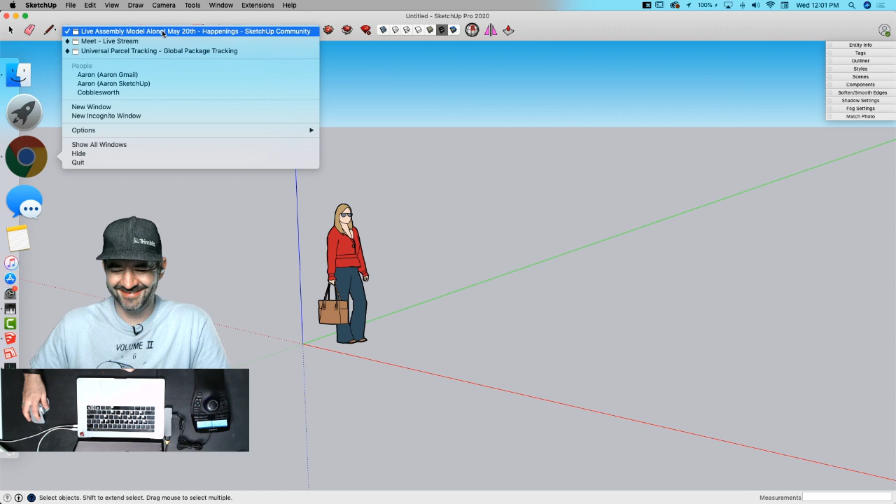It's really cool. Usually my mind's eye just has SketchUp be a group of people in Boulder, Colorado, and then all of a sudden someone not in Colorado is using it. I'm like, what? Where did this guy come from? Turns out there's others out there who like it too. The other thing I do is when I see a SketchUp model in the wild, I'm always like, hey, that's SketchUp. And so then sometimes I'll see the SketchUp blog post a picture and I'll be like, hey, oh wait, that's us, that is SketchUp, literally. Sorry, you can carry on, my wayward son.

Yeah, so we're gonna, I put the term assemblies up because saying machine parts or something like that just seemed to be getting old, but basically they're very similar. I got some drawings here of a couple pieces, and by pieces I mean they're actually like multiple 3-4 pieces that have to be made, and then we can put them together. And I like that, I thought that was cool because I really liked the pieces we were doing before, but something in me just really wanted them to fit together somehow.

And none of them actually lined up before because I don't know where they were all from, I was just picking stuff off of the internet. But these are actually things that go together. So this is a plummer or bearing block. And then I posted the second one, which is, okay, I don't actually know what any of these are. I think this is a kind of bearing block too, maybe, I don't know. It's called a crosshead.

So if you guys know, I mean that's bearable, nice. Someone will tell us what it's actually called or what it actually means soon. I won't say anything else dumb. Somebody who knows what these things are, feel free to enlighten us, because yeah, we're just, we don't know, we're making it up, we're making stuff up.

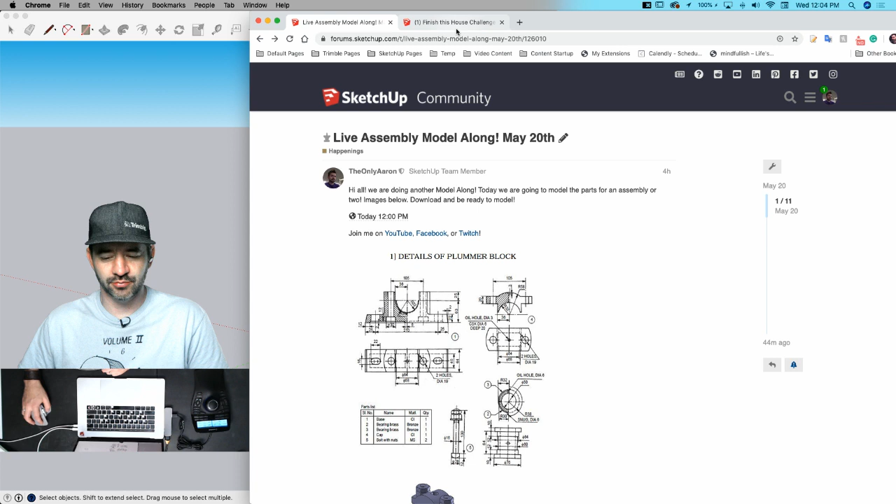Dave Richards, who may or may not have already modeled these, is pointing out that the crosshead is used on a steam engine, so we have a steam engine piece. Wikipedia says it's even used in internal combustion engines, which I suppose is a steam engine, but also other stuff. Well, except there's no combustion. Steam engines don't blow up, right? Well, no, that's true. Internal... well, I mean, pressure, ideally, constant pressure. I don't know.

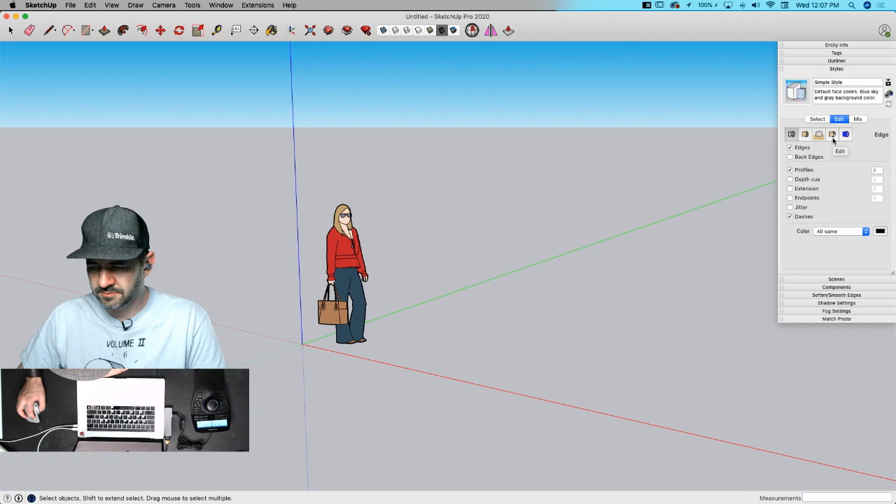All right, so I'm gonna come in here into, as usual, go to my styles. I'm going to edit my current style and go to my watermark tab, 4th one across, and add a new image from my desktop, grab that first one, which is that base piece, and bring that in. I'm gonna put this in the background, fully opaque, and position it in the lower right corner, get it a little bigger. I have to check and make sure I don't remember about my fat head being in the way too, gotta optimize space on the screen.

Ooh, your fat head. Yeah, fat head. If you didn't wear a hat, you might have a little extra room there too. Okay, so here's the thing you mentioned, my hat, which by proxy mentions hair. I've decided this is how I'm going to measure how far into quarantine I am, is how many knots I have to brush out of my hair in the morning. Because normally my hair is short enough that I just kind of use my fingers to get it where I want it and I'm done. But it's getting long enough that I have to actually brush it. Today was a 3-knot day, I hit something 3 times. So that's how far into quarantine I am.

So in a meeting this morning, Andrew over in sunny UK had no hat on, and he looked like he was just embracing bedhead. His hair was just crazy. So I kind of wanted to see what you can do to really build out your coiffure. Maybe I'll share an image on my own social media channels. It seems unprofessional to walk in front of the SketchUp audience representing my company with that thing happening. That's true. These are the most professional things possible that we're doing here.

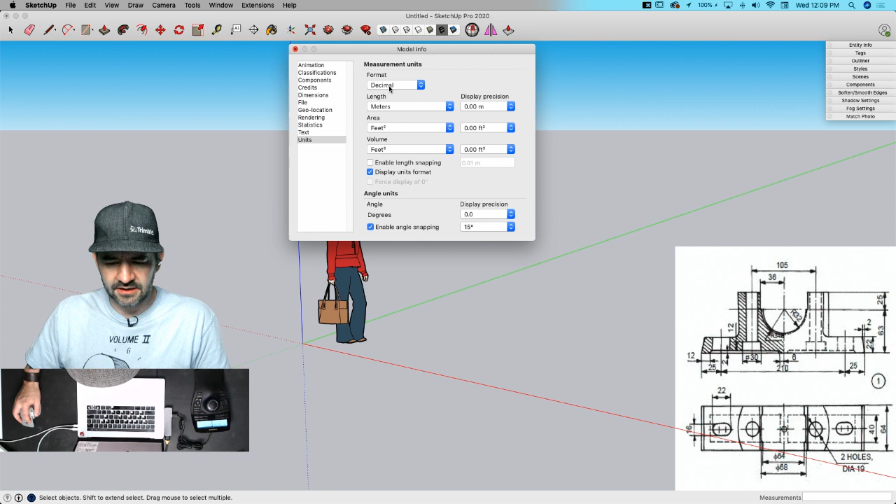Okay, so I'm gonna get in here. I'm gonna go into my model info and modify my units. I'm gonna go to decimal meters. I want to model everything as meters, and then with your help, I'm gonna scale it back down to millimeters when I'm done, which I'm assuming everything here is in millimeters. And it looks like we don't have a whole lot of fractional values, but I'm just gonna go to 2 decimal places. That feels pretty good. I'm gonna disable length snapping. I don't wanna use that at all. And my angle snapping is 15. That should be fine. I think my angles, I don't know that I'll be rotating a whole lot of stuff, so that's what I'm gonna set up with. Decimal meters, two places after the decimal accuracy.

All right, with that, let's get this thing in here. So there's a couple ways I could go about this. My inclination as I look at this block is I see that I have a little bit of a round thing going on here, but my initial thought would be to come in and build this profile first, so build that chunk like that. Well, maybe not. Maybe I should start from the bottom, work up. Yeah, actually, I'm gonna do that. I'm gonna start with this rectangle right here, and then work my way up until I get this post up, and then I'll come back to the side then and cut this chunk out. That's what I'm gonna do.

All right, so I'm gonna start with this rectangle right here. So my initial rectangle is going to be... 260. Oh, is that 260? Yeah, plus 25 and 25. 25. By 64. Something didn't go right there. Oh, yeah, let's try that again. All right, now that that's out of our system, shake it out, shake it out. 260, comma, 64. Still big, different big. It is big. I mean, it's many meters large.

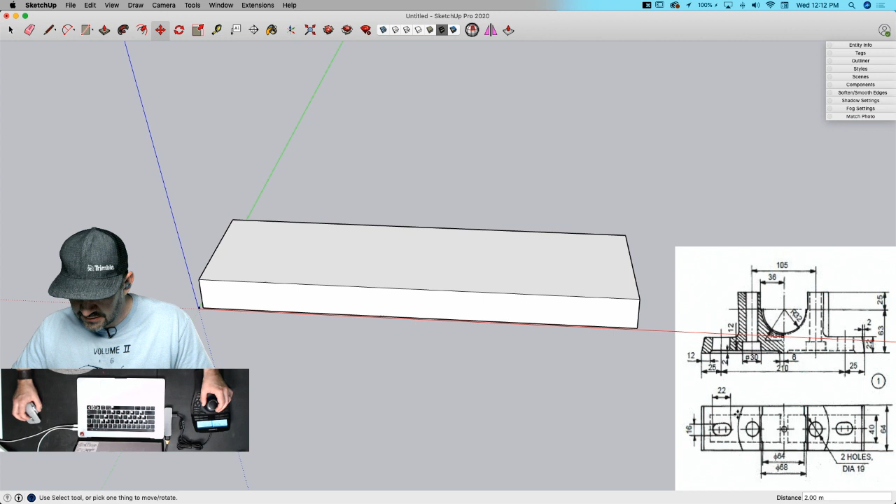I'm looking for a dimension here. This might be the piece. Dave said there's one dimension I'm going to want off, or take off of the other drawing, and maybe this is it. Are you gesturing at the curve there? Yeah. I don't have it. Radius 72 is what it says on that other picture. Is that on the big one? Oh, okay. All right, so I'm going to do this. I'm going to get a couple of reference lines. I know, I'm going to take this to the middle, and take one this way to the middle, and then I'm going to draw a circle. I'm just going to stick with 24. I'm not going to get fancy. 24 is fine. 72 is what the radius was? Is that what you said? Yes, sir. All right.

There we go. All right, looks about right. Take that now, that's going to come up an amount. That amount is 63 and 25.

So what I could do, I don't know, I'm just on a reference line kick. I'm going to pull one reference line up 63. I want to pull another reference line up 25. And the advantage of using reference lines right here is I can come back and still use them later on. So I'm going to pull this one up to the top. But when I come in here to cut this piece down, if this reference line's still here, I can use it later. Did I make those just off? Oh, I pulled them off of the... how about that? I'm gonna get rid of a couple, I don't need the center one anymore. Okay, so far so good.

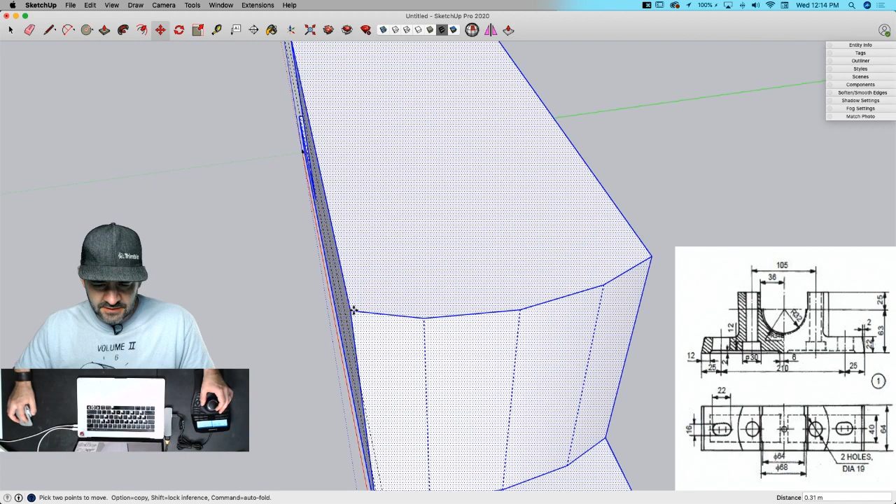You know, it's funny. So as a person who is not a fan of math, I now have children who are required to do math. And like most parents, I tell them, well, it's necessary, you'll need it at some point in your life, which is true. I did, when I did building design, I had to do a lot of mathing. But I still feel bad because the only time I've really had to use algebra is to help my kids with algebra. I feel bad to suggest I'm quoting some Facebook share, but I saw one yesterday that said parents will understand 1/3 of their kids' math, but the other 3/4 they will not understand. Sounds about right. That math checks out.

All right, just because it's going to be easier, I'm going to put these holes in right now before I go cut this block out here. The reason I say it's easier is because as soon as I cut this middle chunk out, I don't have a flat surface to pull a dimension off of. I can always inference, so there's no point where I can't inference to where the center of something is, but it's going to be a little easier to go this way.

I can come in here and from this center line, pull a dimension line over. Well, it's half of 105, so it's 52.5. Look at that. Division. Who knew?

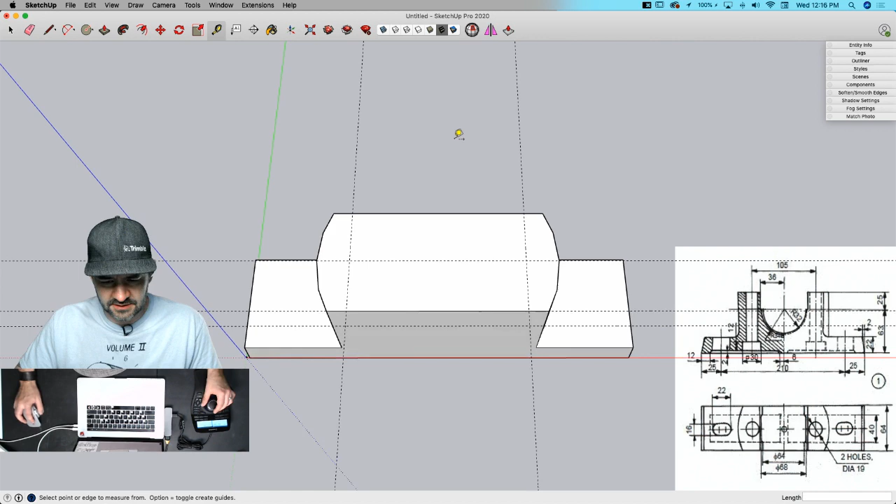Just to get those, and then if I wanted to, I could also go like this and pull that down to the center there. That gives me the 2 holes here. So it's easier to work off this flat before I go in and chop it up.

So my diameter on this is 19. So I'm going to put a circle right here. That is 19 divided by 2. Bam.

19 halves. Nice. I'll just take that - you are using a gigantic calculator, so you might as well. That's right, it's almost like if you don't make the computer do the math, why are you using a computer? My computer can do division too? Wow, and look at Facebook? Get out. Yeah, I know, it's awesome. All the things. Can you even believe it?

All right, so continuing through here. So I have that brought all the way down. And then I have little countersink holes here that are at 30.

So what I'm going to do is I could do an offset, taking this hole as it exists and offsetting half the difference. But for me, I feel like it's going to be easier to go to the center of the hole and just pull it out 15, rather than try to do the math. Let's be honest.

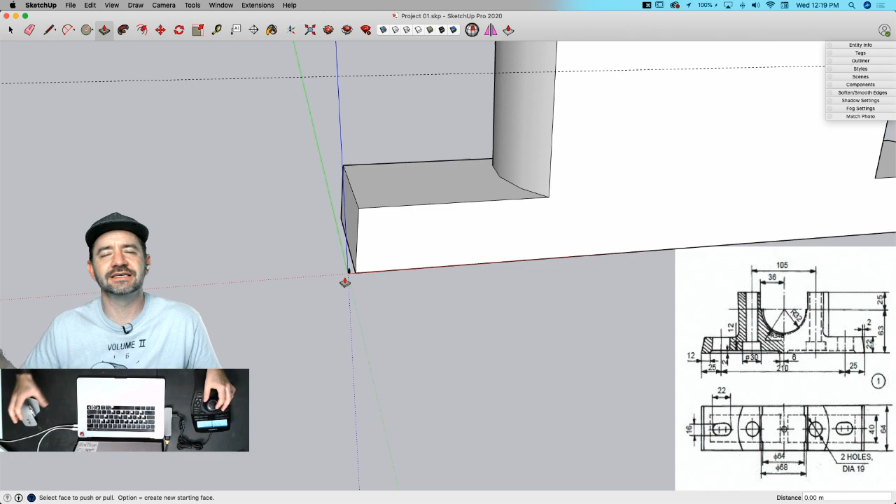All right, speaking of these rectangles down here, let's put them in. I'm going to use a couple more reference lines, or guides. I'm going to put one right at the middle, and then we'll put one at the middle right here as well.

So this is 20 up, 20 down, because it's 40. Those dimensions right there, this direction, right here. 6 over from the center line, and then 12 over from the end. That's my rectangle, so I'm going to draw my rectangle right there.

I'm going to take it, copy it. Actually, we're not going to copy it, I'm going to mirror it, or rotate it. So I'm going to go to my middle point, that's right here. I'm going to do a vertical mirror, modifier key to copy it, mirror it right over there.

So when you have a surface that has multiple pieces like that and you copy more pieces into cut, this can happen. This is not an odd thing to have happen. Usually if you just come in here, throw a couple pieces to stitch it together, it'll come right back. This should do it right here.

All right, then get rid of these pieces, that line. And then that, as I already know, is going to push up 2. So I'm going to put that up 2. I'm going to reverse this face before I push it up 2.

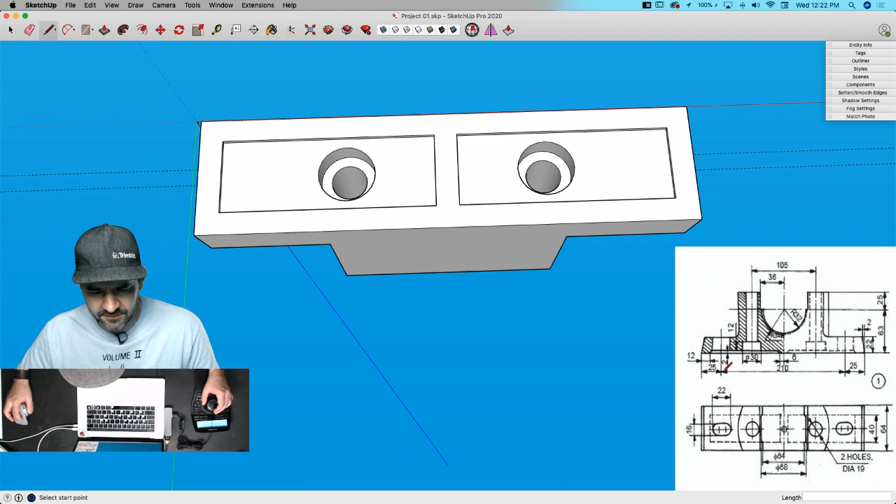And I'm looking at this now and I'm realizing it would have made more sense to put this next circle in beforehand, because the dimension pulls off of here rather than the top, but we'll work it out. So the center of this thing right here is 25 over from the bottom. The reason I say that's an issue is because the top, remember, we moved over 2 already. So what I'm going to do is grab a reference line. I'm going to pull it over not 25, but 23 to the center of this piece right here.

Grab another center line, or reference line, or guide. Why can't I just say guide? Just say guide, dude. Come on.

And then I'm going to use some more guides to put this out. So it's 22 wide, that means take this one this way 11, or 22 halves - that would work also. And then this is going to come this way 8. I'm going to define everything by the number of halves it has now. It works. That's all I'm saying is it works.

So what I have here is basically a circle, or an arc and an arc connected together to make an elliptical type shape. So what I'm going to do is draw a circle right here in the middle and pull it straight up, and I'll draw a line like that.

I'll grab this piece. YouTube said you are guide averse. I mean adverse. Wait, adverts. Averse. Adverts? We'll go with that. Like advertisements?

All right, sure. I'm going to grab these and Command X them, and then Command V them. That looks bigger than the picture for me. Sort of. Does it? It might be. We'll see.

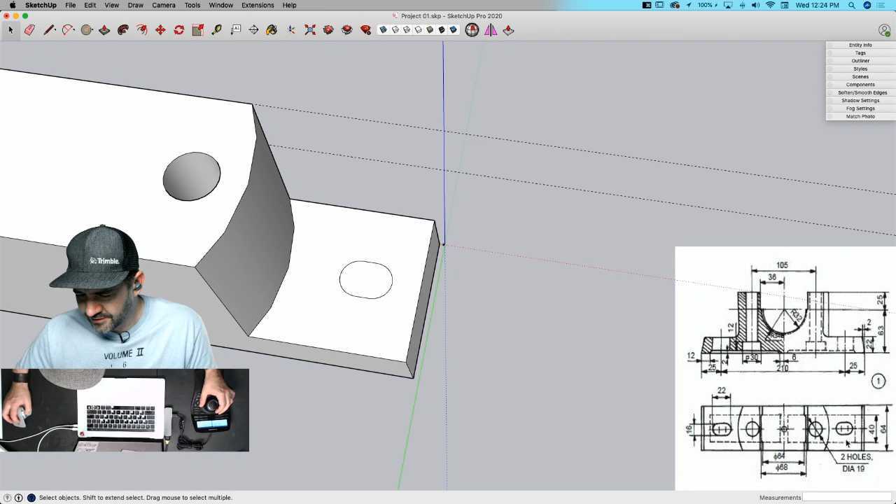This does look like it may have been hand drawn, because another thing I noticed is this hole looks slightly lower than this hole. So it's possible that we're dealing with non-3D modeled stuff here. Wait, what? I know it happens. This was probably designed before SketchUp, and SketchUp is 3D for everyone, but apparently someone just didn't care. I heard there weren't three dimensions before SketchUp was invented. Everything was so flat back then.

All right, so I'm just going to use rotate to go to the center. I can reference the center of these arcs since that's right in the middle, and rotate that around 180 degrees. Then I'll use push-pull to push that to the opposite face, and double-click on this one. There we go. I'm going to triple-click because this is bothering me. Go to Soften and Smooth, turn on Soften Coplanar, and save.

Whew, it's a close one. Close call.

All right, doing good, this is looking good. Let's get back into this main piece right here. So this is most of this block. I have the little indents down below, my countersink for my bolt hole, and this I assume is for screwing this down to some surface. Everything's looking good right now.

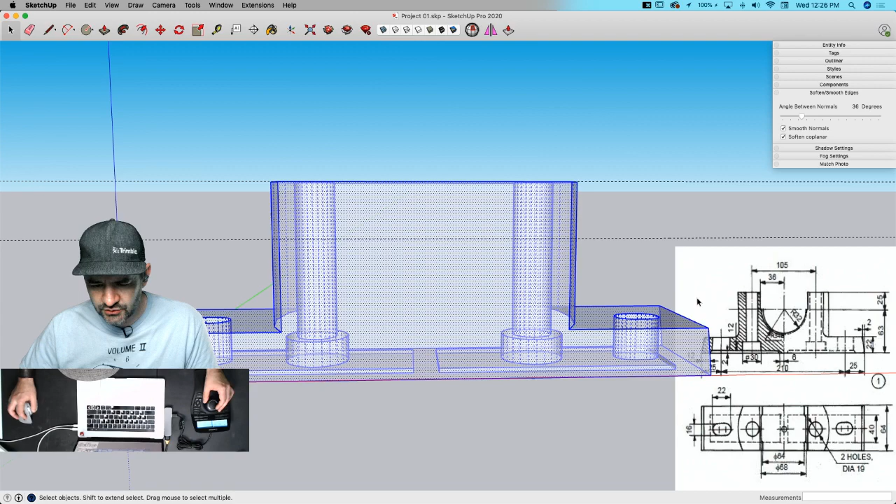So I need to get this piece right here, let's do that. This circle, which has a radius of 32, is at this line. Get rid of X-ray. It's right at this line where this line crosses. I'm going to grab my circle, use the inference off the center of this top line, come straight down to here, and pull this way, 32.

All right, I'm just not doing anything right this second. So what I have here, I'm going to draw a line straight up, and do a guide again, come this way, 36, and take one this way, 36. That looks like that's the piece I need - go over to here, up to here, here to here, and here to here. Then get rid of all of this stuff, and push that back to the back wall.

According to the dimensions, that's correct. So it does look like, again, maybe because it's hand drawn, that lip doesn't look quite as big on the drawing, but that is what the dimensions call for.

I think we just finished a piece. Actually, it looks like there's a second lip here. All right, might have to go reference the other drawing.

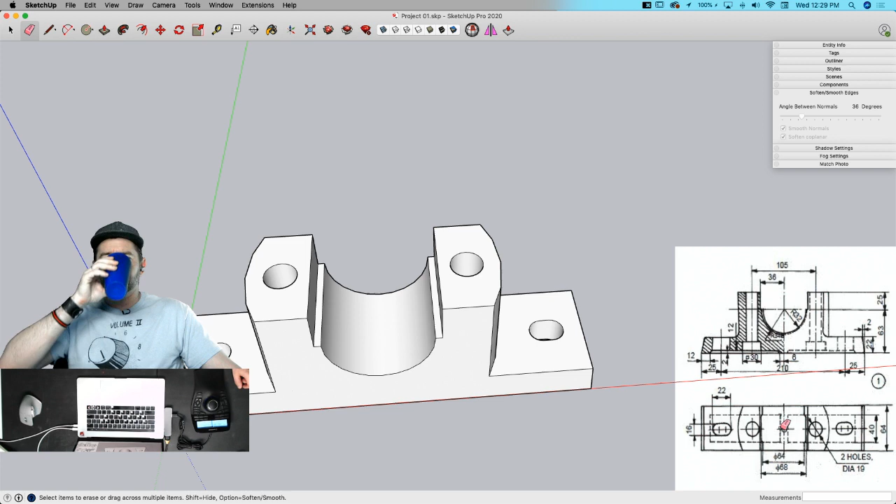Oh, hold on. So I'm leaning forward with my squinty eye, mouth open thing trying to figure this out, and it's still not working, my teeth are all sticking out. Have you tried turning your head to the side a little bit when you do that? Wait just a minute, I'll turn down the audio, I'll turn my radio off.

So this is what I'm seeing right here, this piece right here, but I don't understand, it comes back on this side too. Wait, where's your cursor? I don't know what you're pointing at. Oh, over there, I see it. Sorry, over here. So it comes this way, but then I also have one that goes this way.

Is it thinner on the inside, or thicker? Is this 32 the inside? Oh, it's the same depth as the notch. So the reference picture has got the top on it, if I were seeing transparency, it's as deep as the notch. So is it this? Is that what I'm seeing, or is it the opposite, where the thicker piece is on the outside?

I don't know, but it looks like - oh sorry, I was looking at the reference picture under my head. Sorry about that, New Southern Workshop. See? Told you my fat head would get in the way, just take that thing off.

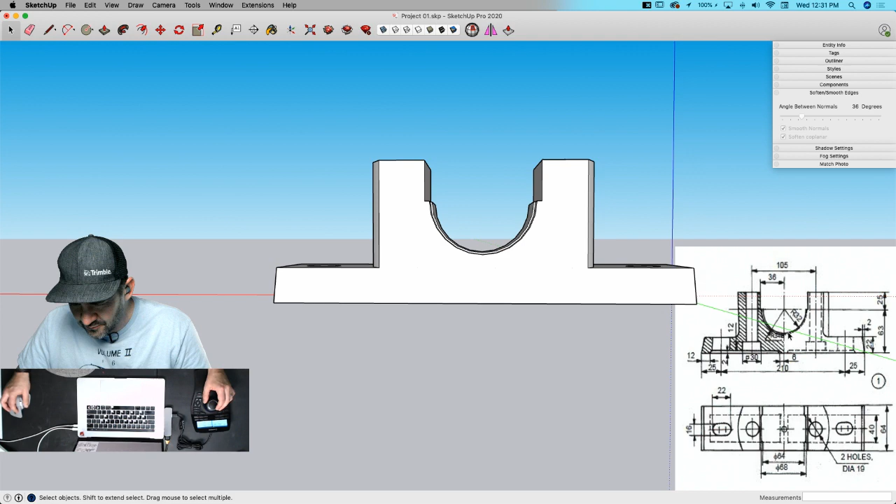So let me tell you why I think this is correct. Because I can see a little line right here, not just on this cross section, but on this side too. See the second line? So I kind of feel like that's correct, but I don't feel so convinced that I would argue if somebody told me I was incorrect.

Looking at that other picture though, it looks like you have it backwards. I know, this coming here, but then again, here we look at the reference. This shows it coming out like that. See that, right there? But maybe that's part of the top piece.

Oh, since that's the bearing that comes out like that? So there's a hole. Oh, because it's for lubrication. Yep, yep. Okay.

So here's what I'm gonna do. I'm gonna take this piece right here and copy it back out to here. I'm gonna do the same thing on the other side, grab this piece, and copy it out to here. Now I'm going to push this all the way through to get rid of it. So this right now is at the smaller dimension. I'll take these outside pieces and push those through to that inside depth, 12.

I should just be able to double click this one. There it goes. And now it gets rid of these extra lines, so that is the hole, because there's actually a hole top and bottom for running lubrication through here, and that would be the channel that would lubricate between the body and the bearing. That makes a lot of sense. I'm gonna save.

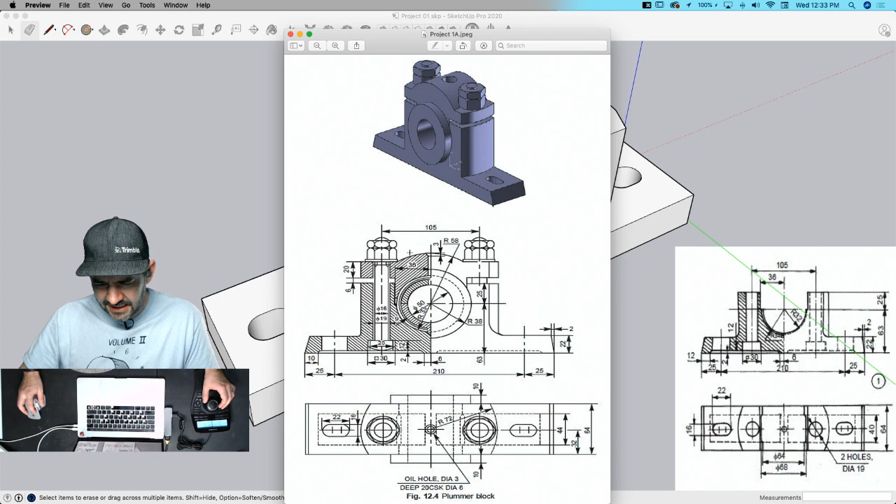Maybe it's like plumber, it was just named after a guy named Jeremy Zirk or something like that. That makes sense. This actually only shows it on the top, so I don't know why they're showing it on the bottom, it would all just run right out then.

Alright, I'm going to grab that piece, make it a component, and call it... sorry, part of 1. Jealous Elephant just said to just say nipple. And the 10-year-old in me just giggled at that.

It happens. Alright, I'm going to take this image now. I'm going to say that we're good with this for now. Wait, Dave said something about checking my holes down here. Well yeah, make sure the hole will actually fit the bolt or the nut in there later. We'll come back and mess with it if we have to, but I'm going to work off of this for now, just rework it later.

And this should be 19. I'm just going to verify that I did do the right numbers. 19, okay, so new piece. So I'm going to go back up to my styles and grab my existing watermark, double click it, browse, and switch to my top piece, which I think is that guy right there.

Looks good, that's small enough. I'm going to make it even a little bigger. Okay.

All right, so some of my dimensions on here are going to be pretty easy. In fact, I could probably steal some geometry. I think I can come in here, grab this piece, this piece, this piece, this piece, this little tiny piece right here, and this piece right here, and Command C to copy it.

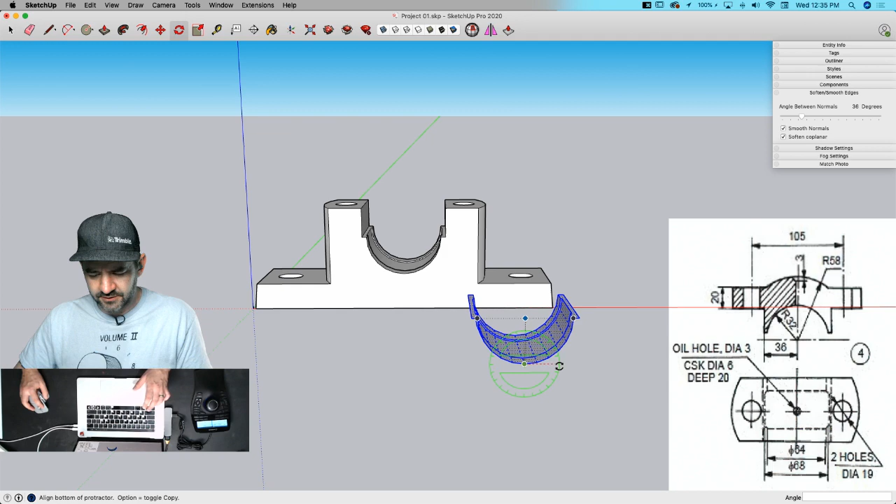I'm going to leave context, get all the way out, and Command V to paste it. And then I will take that and use rotate to just flip it over. And now I should be able to take that and place it right here. That should be the perfect fitting piece from the other side, except that would seem so perfect.

But it doesn't look like it actually comes all the way down. See that? Look at that little gap right there from the radius. So I'm starting right here. It looks like it's up here a little ways. Is that just the hatch pattern? No, because it's on the non-cut through side too.

See that? But it doesn't have a dimension for where that is. But it's still geometry we can use to build this out. So I'm going to leave it right here, just leave the geometry hanging out, not doing anything. And I'm going to build up the top and just intersect it out, and we'll close it out somehow. I don't actually have a vertical dimension, so I don't even know what that is.

So hold on, let's take a little peek back over here and see.

No, it looks like it comes all the way down on this picture. Oh no, but there's a gap. That makes sense. Mind the gap. There is a 6-millimeter gap. That's how you would clamp it shut. That makes sense. Okay, so 20 with the 6.

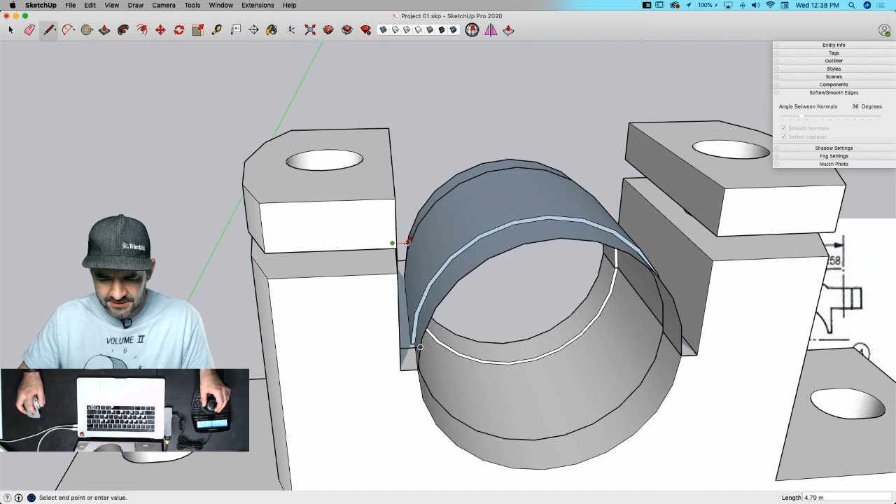I go straight across this way and back up. That gives me that face there. Do the same thing on this side. I'll come straight across like that. And just to close out the side, I know we have an arc here, but I'm just going to do this to close that.

And that would be half of this. Oh, kind of, I'd still have to come across here. Like, click there, click there, click there, click there, click there, and, oh, that closed it. Then I could get rid of all this geometry here.

Something like that? Maybe so. Maybe so. Maybe. Look at the other drawing. I closed it, can't look at it ever again. Ah, I know, it's the worst.

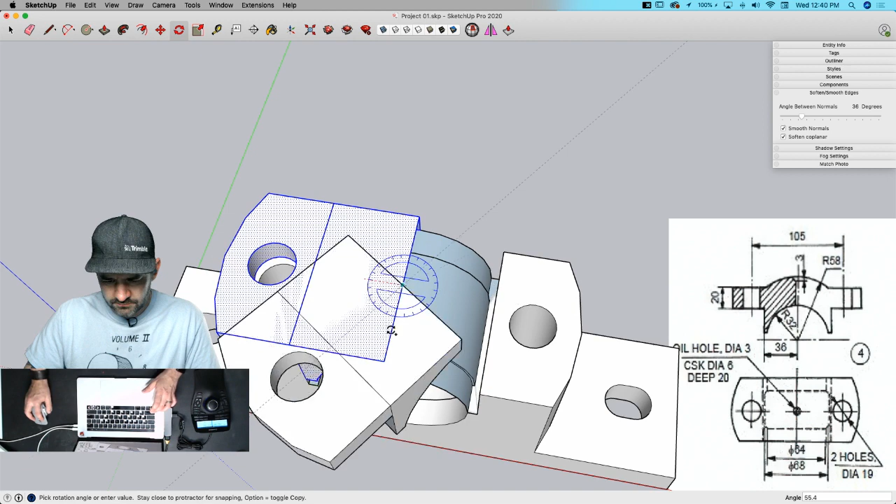I keep getting confused because we have to put in the bushing or whatever. Yeah, there's going to be another piece in there. I'm going to grab all of this, rotate that around the center here, like that. I can get rid of that line anyhow. And get rid of these pieces in here.

Whoops, something didn't break. Something didn't break. Oh, I didn't do what? What? That was it.

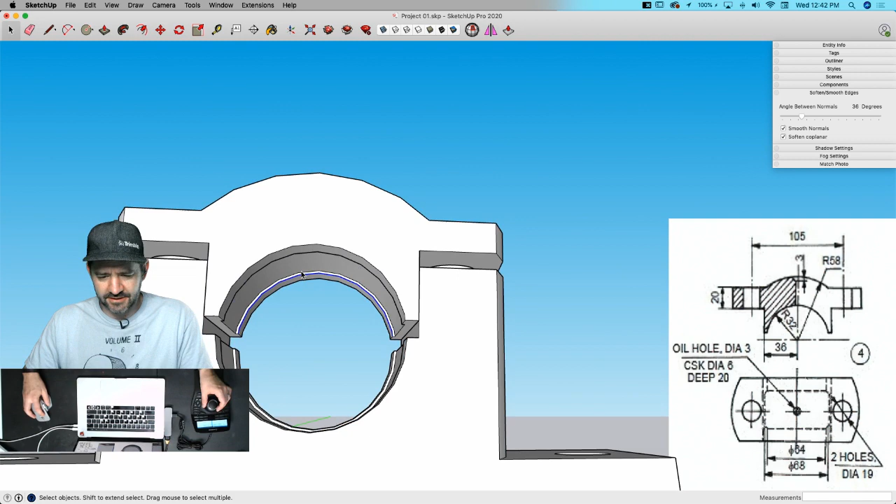All right. So what we have here, if I put a line right across here, at the middle of this line, I want a circle that has a diameter of 3 going down there, and then at 3 deep, it's going to open to 6.

Hold on, I got a couple of questions that I don't understand. Yeah, I was trying to understand them to then repeat them.

Okay, so for the circle, I just decided across the board I was going to draw everything with 24 sides. And that was just something I started with, and I'm just sticking with it. If I was actually planning on printing this out and wanted a smoother circle, I would probably do that arc with more sides. But I'm just sticking with 24 in this particular case.

I think Alejandro was asking a question unrelated to this model, because he had a question right above that too. He's wanting to do organic elements. Yeah, if you're going to do something more organic, then yes, I would suggest more sides.

But that's really up to you. If I'm doing organic, I'll probably do something more like subdivision modeling, which breaks it down so I don't have to work in high polygons. I can work in low polygon versions and then increase the organicness for output.

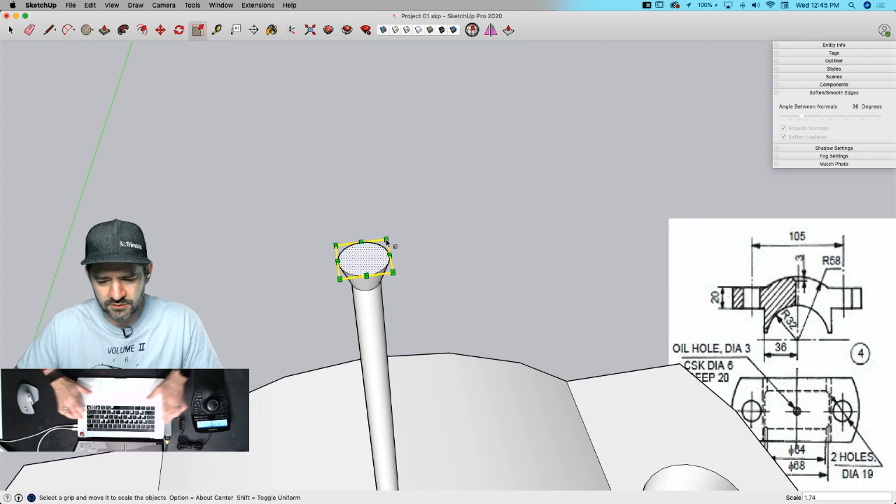I'm going to pull that up some amount. And then at that amount, I'm going to do a push-pull with a modifier key to pull that up 3. Then I'm going to grab that piece at the top. I'm going to scale, pull about the middle to 2, which is going to make it twice as big. So this circle right now, this here is 6. This circle is 3. This height right here is 3.

Now I can take all this geometry, grab it by this edge, move it vertically straight down till it intersects back into that piece. It sticks through because I made it long. Now I can grab all of this, right click, intersect face with selection. And then all I have to do is come delete some extra geometry. Not bad. Orient faces. Thank you very much.

And I will just alt erase these 2 lines to get rid of those. So there we have our, I almost call it a fuel port, our oil hole. Oil hole. Oil hole. Thank you. Okay. Let's triple click that.

Make component. And this is part 4, according to the drawing.

All right. And I would probably save at this point. I don't know about you, but we'll give it a shot. We'll see what happens. What's the worst that could happen? Nope. Let's not talk about that. There's some wood to knock on.

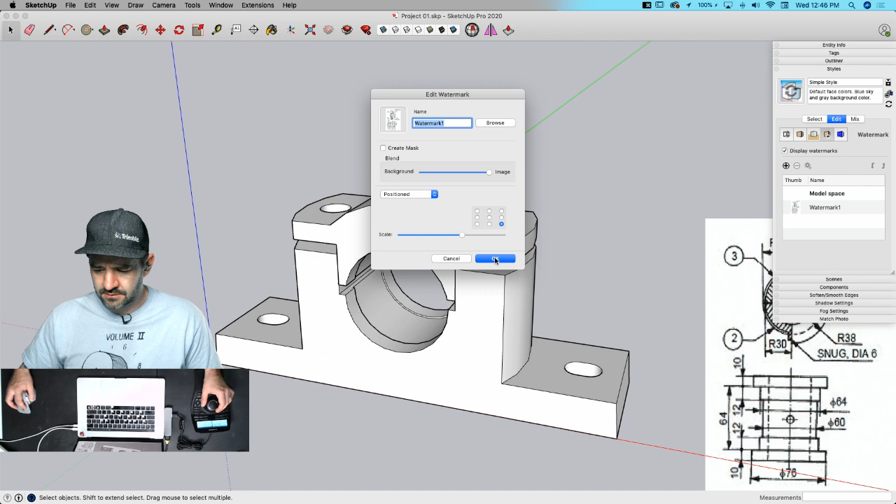Right here. Okay. This should be pretty easy because this looks like this is just a bunch of stacking holes. And I don't know if this is where saying stupid things like this should be easy is where I get shot in the foot, but I'm an optimist. Definitely a Murphy's Law moment. That's right. Yeah. Let's see what you got, Murphy.

All right, so I'm going to start with a circle and put it at the center. Inference over this, put it right here.

So if I pull that straight up till it hits an edge, I get 32 or 64, which I have on here. So if I'm going to make that circle, that's right here, that's this dimension right here. So that amount goes in 12. I'm just going to pull that in 12.

For the sake of making this easy to see, I'm going to hide this top piece. So that's what I did, I pulled that in that amount. The inside ring right here is 60, so I can draw another circle from the center there. Pull that up 30. I'm trying to align my axes, so every time I'm always pulling straight up or straight to the side, following the blue or red axes.

And then I can pull that one this direction. It should be just right here. Yes, 64 minus 24. And then here I can draw another circle, pull that straight down, that again is my 64. Whoops, I missed it. Pull it straight down.

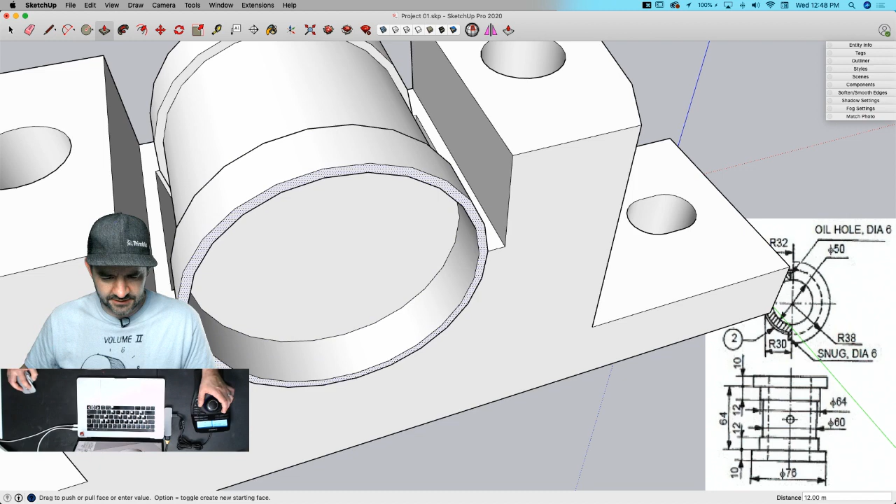Straight out, that's my 32, aka 64. Pull it out to here, and pull this one out to here too, and erase that circle. All right, so we have this piece and this piece, sans the hole through, or the hole in the top. So let's keep going there.

I'll draw another circle right here, pull along the red axes, and this should be 76 halves. Right there, and that comes out another 10. So I'll pull this 10, double click here, get rid of that.

This is obviously a piece that is symmetrical, so I always get that question: couldn't I just draw half of that? In theory that always sounds very nice, but there are times where setting it up to draw half of it is more work than just drawing a circle and push-pulling it. In this case, that was super easy.

The interior is a radius of 38, so I'm going to draw one more circle to the center, pull that up 38. Nope, that's wrong, absolutely wrong number. That's a good try though.

The inside is a diameter of 50, so I'm going to pull it up 25, and I should be able to take that and push it all the way through. All right, so that is most of my...

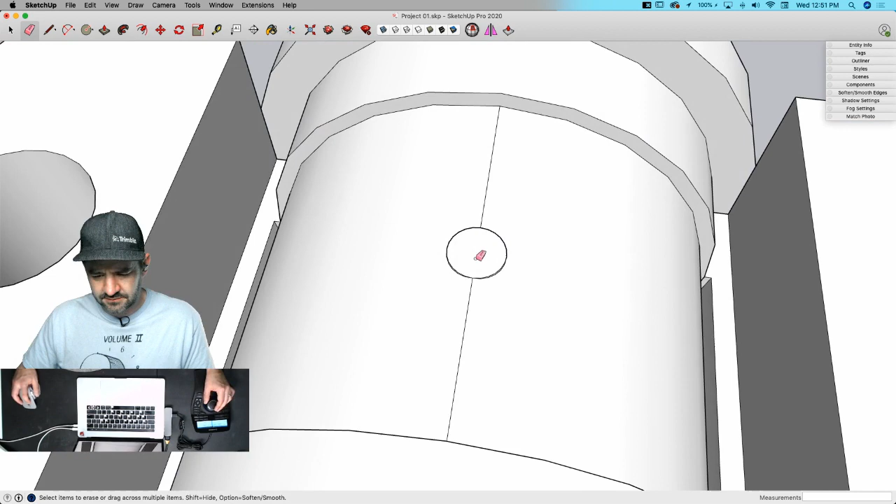Okay, I can say it right: orient faces, and I can grab all of that, and I'll just soften and smooth it to get rid of those lines I just drew on there. Okay.

I'm going to go ahead and save it. Now, go to the Outliner, everybody, and turn part 4 back on. All right.

I will, but wait, this is actually... I'm not going to do this because there's definitely a lack of information here. This is a bearing, so there's multiple pieces here, but they're supposed to be showing me something here. But you see I have part 3 and part 2 separate, but they both say in the materials that they're both brass bearings. So we're going to call this whole thing part 0203. How about that? Now I covered the fact that I don't know what the rest of it is.

Hey, it's working, it's looking good. Yeah, so this is...

Who's got this? Who recognizes the reference? This is a reference to a t-shirt. No, this is a reference, it's a t-shirt that's referencing a movie. Wow, thank you Jody, it's a good thing you're here. Oh man, it's a good thing, yeah. How embarrassing.

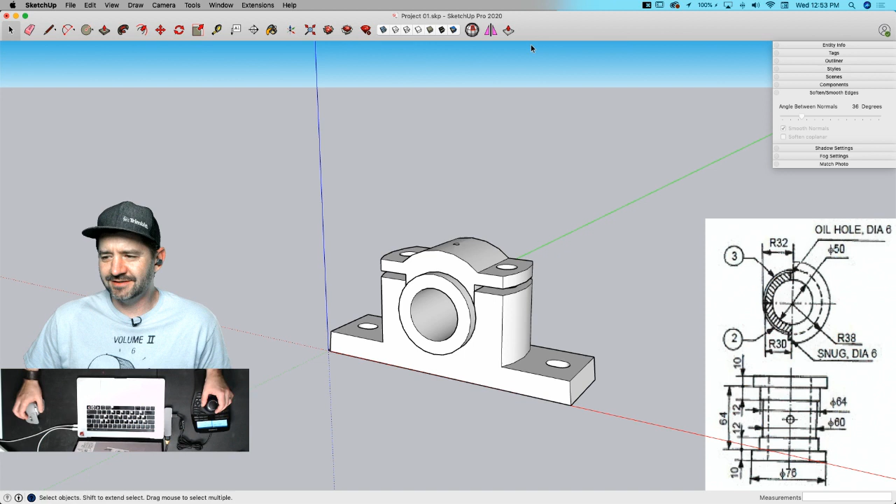Okay, that's right, Brad got it. Second volume knob goes to 11. Smell the glove, you're all right. This is Spinal Tap, the official title of the movie. You are correct. You guys are also right.

Let's put some screws on here. Where are we at? We're less than an hour in right now. I'm having that constant debate - am I going to put threads in this? I don't know.

Now that Dave has walked me through putting in threads, it's not so bad, but I don't know how much time I want to spend on it. Let's get everything else in there and see how long that takes. If it takes longer than 10 minutes, maybe we'll just skip the threads and make it narrower.

All right, let's change the image. Go back to styles. Change my watermark one more time to my bolt.

So this is all simple enough. I got a taper here where it's only threaded at the end. The head's a piece of cake, no problem. My only real question is this: when I was looking at the original image, I kind of thought these were two separate nuts, like the second one locks the first one in place. This makes it look like maybe this is a cap. I'm not really sure what to do right now.

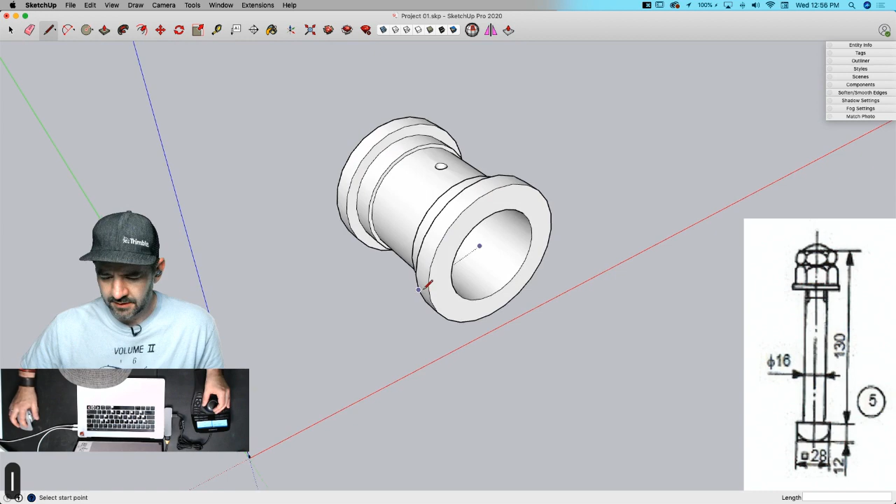Okay, here's how I'm going to do that. I'm going to go hide these two pieces, and I'm going to draw a rectangle at the middle point. Okay, now it's devolved into puns, so we'll just carry on here. That's better, now I feel comfortable with what's going on.

I'm going to take this whole thing and make it a group, and then grab my solid tools and subtract this from this, and give me a half. Nice. I'm going to take that and rotate it 180 degrees. I'm assuming the bottom piece doesn't have a hole in it, or is that a fair assumption? I think that is accurate. So I will... oops, ooh, that was exciting. You monster, what's going on here?

Well hey, this could be a stitching opportunity if you play your cards right. Yeah, it's not very much stitching, it's just like a tease. Is that the Ellen logo?

And then I'll alt-erase that. All right, so - oh, Dave said there's a hole in the bottom too. I think these people are pulling legs, legs are being pulled. All right, no, fine, I'll leave a hole, I don't care. I've stopped caring, I don't care.

All right, so now, for my components, I can take this bottom one, make it a component, and I'll call this one part 02. This top one will be part 03. All right, and now I can come out here, show my other stuff.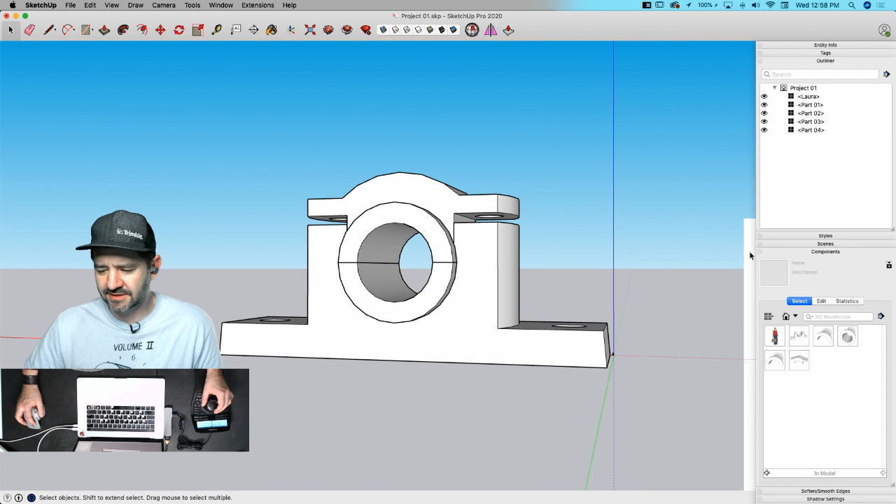All right, I've learned so much about this thing that I still don't remember what it's called. The plummer block, that's right. Plumber, not plumber, plumber - named after Christopher Plummer, who was in Sound of Music, which we were referencing just moments ago. Obviously so - must be where the name came from.

Obviously I didn't pay attention. Okay, so

Because this piece has a round end, I'm kind of inclined to make this whole thing a follow me. But the only issue with a follow me, the reason I don't like to do more follow me work is because with a follow me, you don't ever end up with a circle you can inference the middle off of. I mean, it can go either way. It's really a preference thing.

So I'm kind of feeling like what I'll do is I will start down here with a circle, and I will make this piece right here. So I will make this 14, and then on top of that, I'll draw this 16.

I'll pull that up 30, 130, and then for the bottom, I'll come in here, draw a line down 12, and then put an arc.

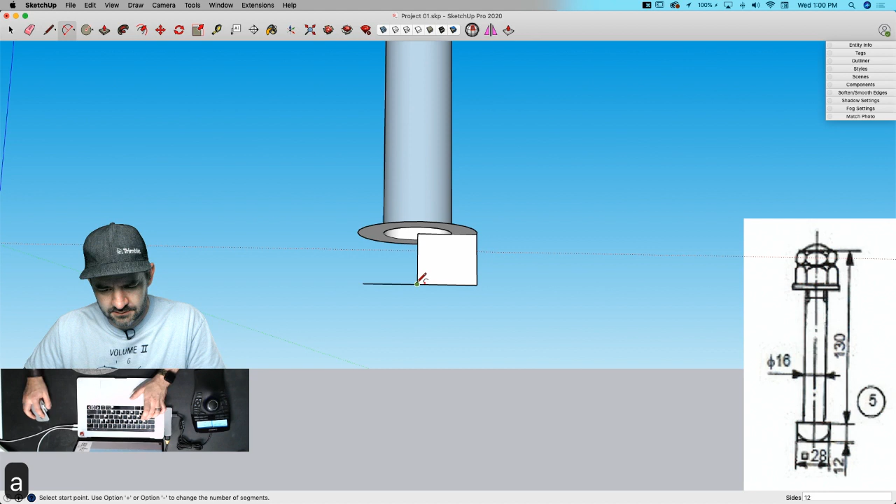I don't know. Here, let me draw a line like this so I can inference that. Maybe there's a full. Let's see. Just go like this. It kind of looks like it only goes halfway.

It does. Looks like it's flat right there, right? Yep. All right. Well, so we'll say not flat. I mean, it looks flat, but which means we're going to have to use a Bezier. We can't use a standard curve there. So I go from here to halfway, pull it up parallel this way, and then I don't know, something like that.

Take it back. David said it's a square-headed bolt. All right, I'd like to see where your evidence is to that. I see nothing to support this conclusion. I'm not saying you're not right.

Okay, so if it was a hex, then it would look like the hex pieces up top. Wait, but if it's round, oh, the corners are chamfered. That's what he's saying, which I guess makes sense. That way it's going to keep it.

Will this even fit in? Yeah, see, if it was square, it wouldn't go in there. Is that where it's supposed to go? Is that the appropriate hole for that? It is.

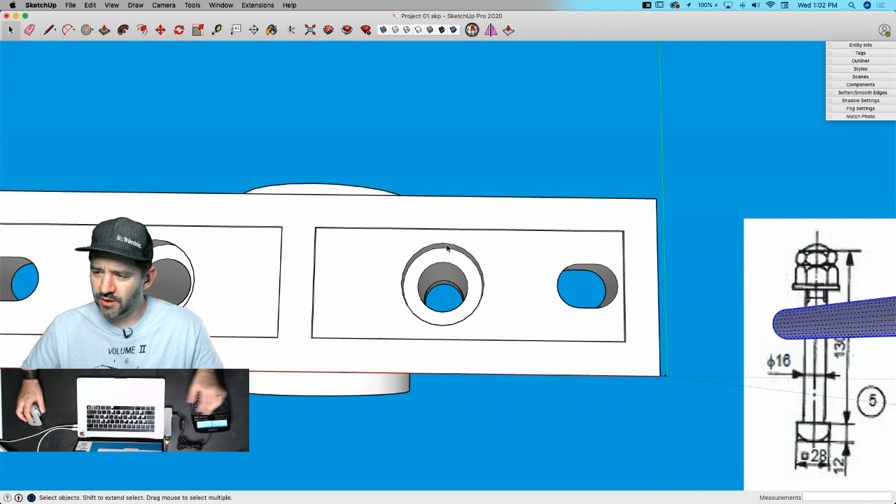I mean, it's not in the picture, but undo, angry undo. Oh, interesting. Not really, so I'm not angry. Oh, okay, okay, so if that is the case, see, this is. I like doing this kind of stuff. I'm totally joking about being irritated in the slightest.

Then I could go 28, 28. Come here and knock my corners off a bit. Pull that up 12.

You know, when you go search the internet for plumber head, you don't get a whole lot of. You don't get. Oh, because it's a block. I'm a blockhead. Plumber head does not get you much in the way of helpful data.

And then it's rounded off this way.

Yeah, okay, so does that, so going back to my question before, is this supposed to be square too? Right, it's not like called out. There's not, you just see, yeah, it's all in kind of profile, covered, you don't see up, but we're only looking at it from... which I mean, I'm not disagreeing with you guys. I got where you're coming from. We'll do it. We got it.

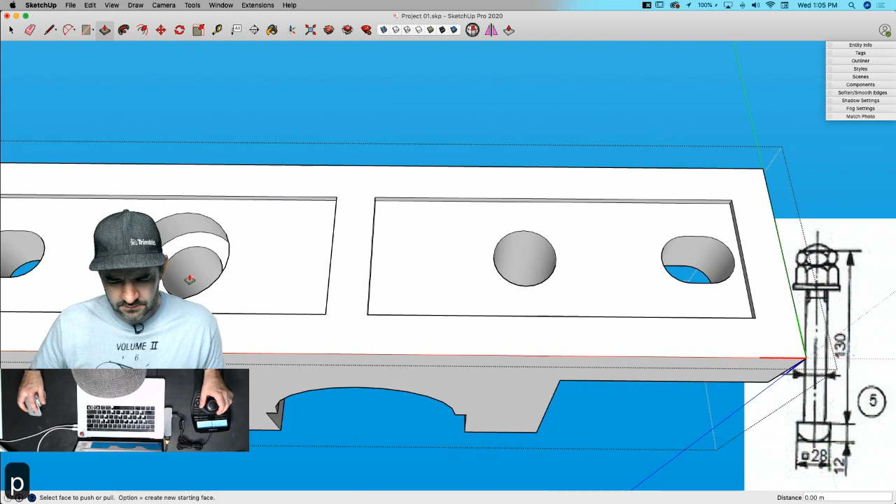Ooh, okay, I'm putting a picture that I just ran across here. It's from SolidWorks, but it says showing an exploded view of this thing. And then you can look at this.

All right, look at it on the form. It makes a lot more sense now. Yeah. Got it, we got it. We got this, don't even worry about it. No, I wasn't worried, I was never worried. Good, good to know.

All right, I forgot how far to push this in. 12? 12.

So should I not have rounded these corners? Is it just the top that's rounded? It's just a chamfer. Oops.

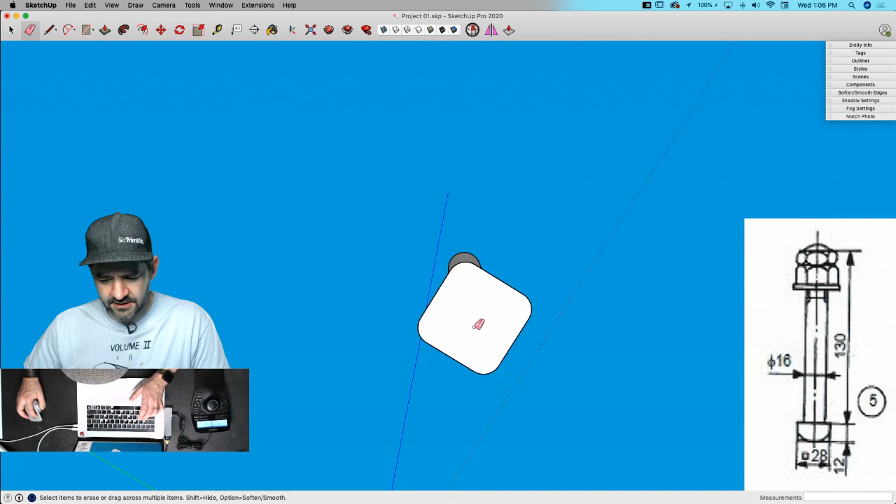All right, let me do this all over again then. Get rid of all this. So then we'll go rectangle one more time from the center. Find midpoint there, midpoint there. 28, and I get rid of these little curves I put in here. Pull that back up to here. And that didn't break, so I'm just going to draw a line to force that break.

All right, now what I want to do is I'm going to come here and draw a line straight across. And then I'm going to draw a Bezier curve from here to here. Pull down. Actually, I got to go a little further than that, don't I? Yeah, there are lots of good suggestions.

Yeah, I'm going to take that over here. Get rid of this, all this. And then I'm just going to draw a circle up above this one. Select that. Follow me with this.

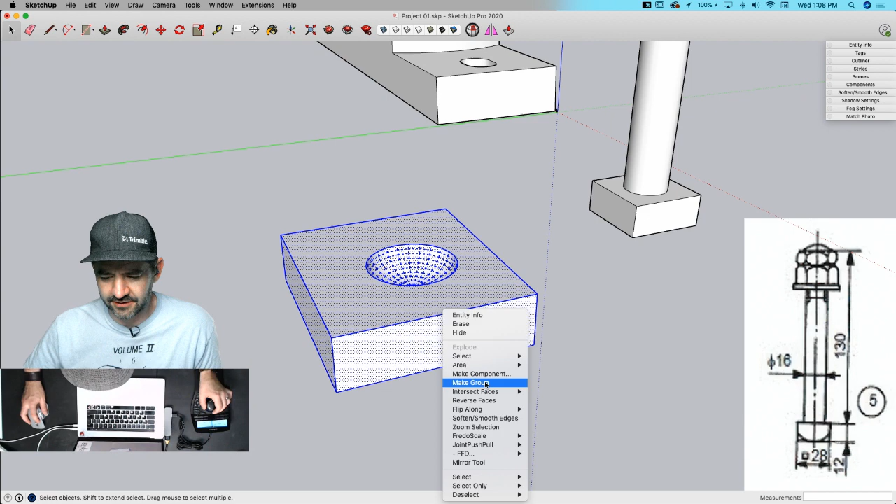Totally unnecessary, but what I did right there is now I made this into potentially a solid. So I could make that a group. I grab this, make this a group, and then I can align it here. So that should all line up.

Oops, wrong button. Get behind. There we go. And take that then and say move it from here vertically to my bottom point here. Let me turn on my hidden just to see, make sure I get to that. Yep, boom, right there.

All right, so now what I could do is I could say take this, go back to my solid tools, and subtract that from my not a solid. Why are you not a solid? Come on, man. Oh, because I had an internal face. I broke it, but I didn't delete it.

All right, try that again. Select here, cut from this. I didn't do that right. That's lovely.

Dave said it's going to be too small. I just started doing things, and then the thinking kind of fell to the wayside there. It's because you said logic. You're talking about what seemed logical to you, the guy who does not like math.

Right. So this is 39.6. Let me try this again. When I come in here, I could come in here and say here to here is 39.6. Rescale that group real quick. There we go. And now we can.

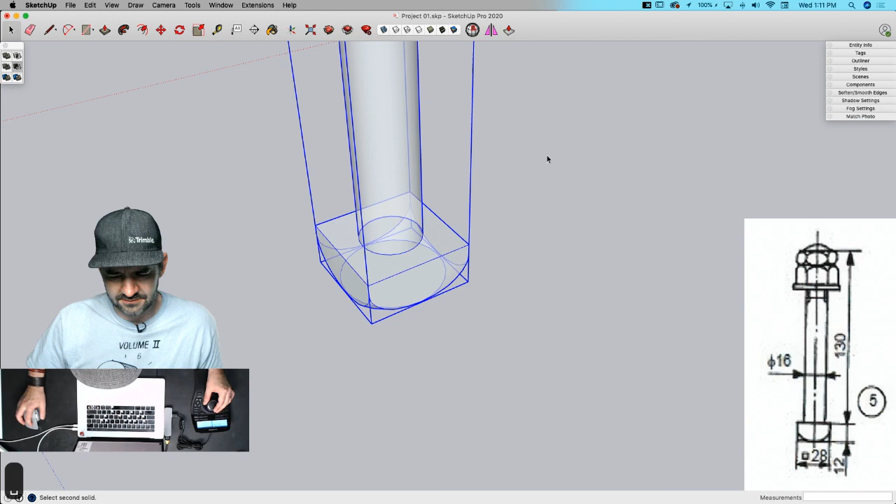All right, but it's not perfect. I'm going to do it. I'm going to cut that from this. That'll give me that. I feel good about that.

So that's what I'm going to do. I'm going to take that and I'm going to, oh, it's already a group. I don't have to do anything else with it.

There was an impressive amount of time and effort that went into adding that chamfer to that bolt. Who would have thought? I would have thought that thing would have been one of the easier tasks. Well, maybe, I think part of it was I was honestly a little bit caught off guard by that one.

I'm going to line that with the center. I'll push that vertically up into there.

All right, and I'm not going to draw threads. I'm sorry, we've done threads before. So I'm going to just come in here and I'm just going to draw a new circle from the center. What is this now? This is 8, so I'm going to draw it 7. And I'm just going to strip this part down a little bit like that, representing where threads would go. I might even come in here and do something like this, emulate kind of what they got here where the threads start. Grab that and move it vertical. Other vertical. There we go. I feel good about that.

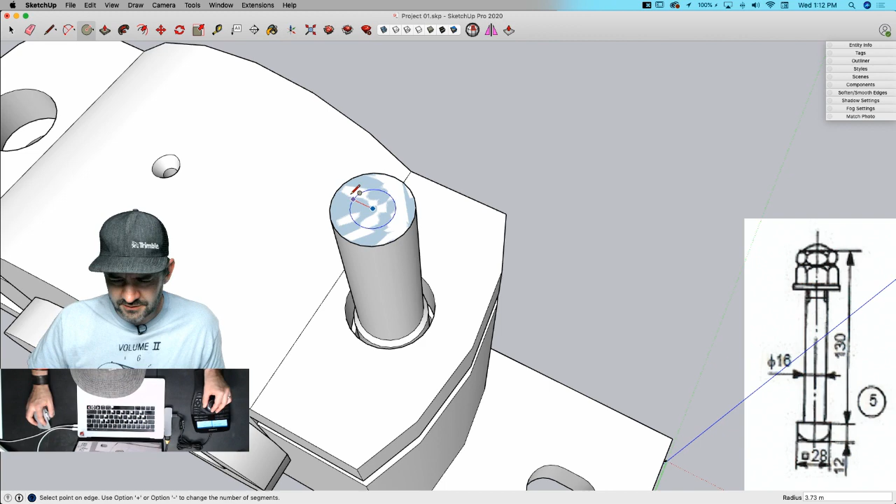All right, now we get to draw these. I was a little more prepared for this one. So I'm going to start by drawing a circle right on top of this one, then another circle. I'll take this one on the red axis to where it hits this line - that's going to be the lip right here. I'll push that up to 1.

Then I'm going to grab a polygon with 6 sides. I'll go to the center and pull that out vertically. If it comes all the way to the edge, it's here, but it doesn't - it comes just back from it. So I'll go to 12. I'm going to try to use even dimensions if I can, and pull that up to... we'll go to 8. No, let's go bigger, let's go 9. It's just so crazy.

That is my lower nut. And what I think I'm going to do is make a reusable cutter.

I'm going to do this by drawing a rectangle like that, and I'm going to put an arc on there that's just going to kiss the edge, just past the edge right there.

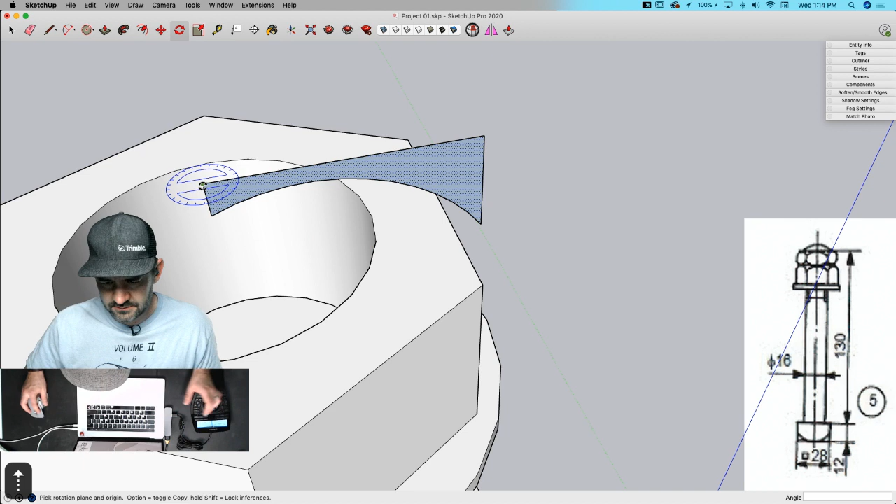That's what I want - I just want to knock those corners off, just like I got here. This is where I could play with this and fidget to make it just perfect so it takes just the right amount off, but you get the idea, right? You guys got it, you're smart people. Yeah, that's what I want, I want to knock those corners off like that, just my own sense of OCD.

I'm going to break it right there. I'm going to put a circle directly above that piece, select that, follow me with this. Yeah, look at that, see how that cup sits right on there? Perfect.

All right, so I'm going to grab all of that, make that into a group, grab my solid tools again. I don't know why I keep turning it off. Let's just set it here and leave it, shall we? I'll put it right there, and rather than use subtract this time, I'm just going to use trim that from the nut, and then I can move that piece up, and there we go - got those corners knocked off.

Nice, looks like a corner knockoff. Yep, that's what we shoot for here.

All right, I'm going to grab this piece. I'm going to go to rotate, and I'm going to rotate a copy on top of itself. Rather than do all that again, which I don't want to do - actually, I guess I don't need that cutter anymore. I lied, I did not, yeah, I don't use that. So I'm going to just take this, pull it down so that goes away.

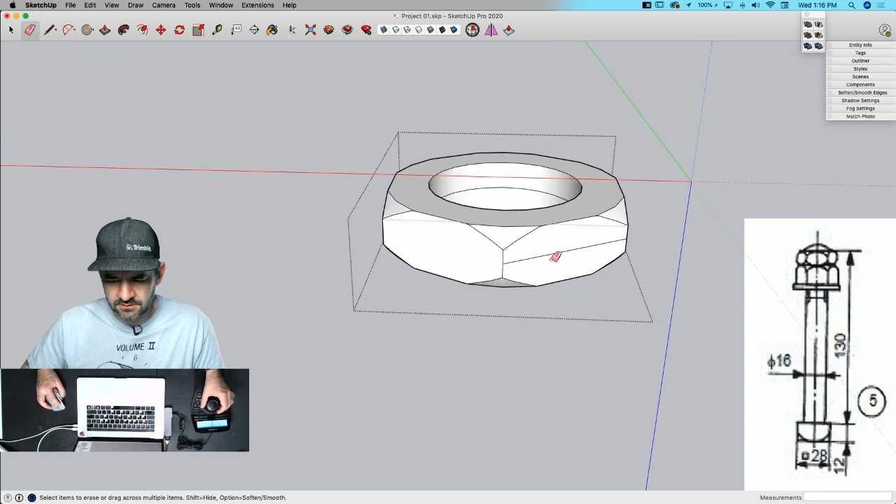Perfection. Whew, that's what I would have told somebody if I didn't know better. That is perfect. All right, let's take that now.

Drop that down on here. I don't know where this 30 came from for this nut length - 130, that's excessive, that's way bigger. That's curious, or did I go bigger than that? That's possible too. No, that's 130 meters, just like a normal bolt is.

All right, so I'm just going to push this down so it just peeks up, just past, like that. I'm making executive decisions. All right, I'm going to grab all of those pieces and make those into one more component called part 05.

Awesome. To put that onto the other side, there's a couple things I could do. It's kind of hard because horizontally there's not a whole lot to copy from. My inkling - oh, here we go, this is the easiest way to do it. I'll move it from the bottom. So I'm going to grab here, copy to here, and there we go.

That should finish that piece, almost, because I'm going to scale it, of course. Silly.

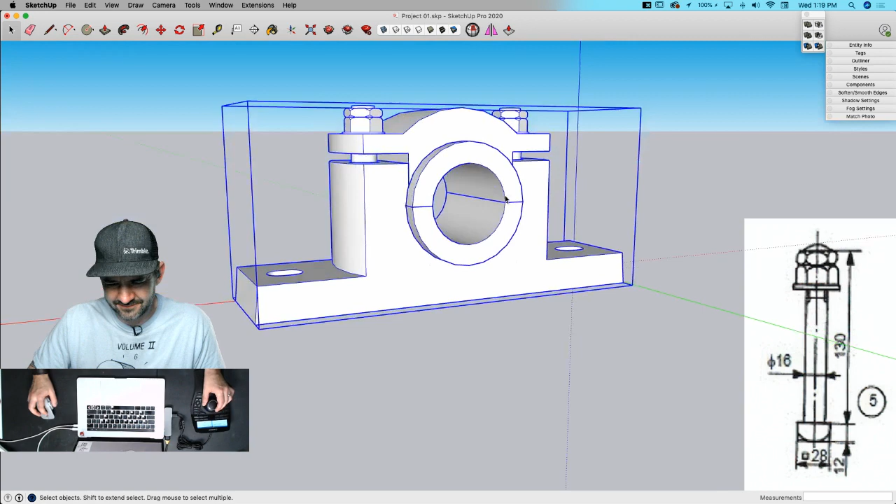So yeah, I'm gonna grab all this, it's really a big gap between the top plate and the bottom block. That's 6 millimeters, I guess. I'm gonna assume it's so you can bolt something. Maybe you're supposed to bolt something else to that there. I don't know, I don't know, I think 'I don't know' is a solid answer. We all dunno.

All of us together dunno. The internet's got all over the place, so I'm guessing it's right. The internet wouldn't be wrong, I've yet to see that happen.

All right, this is 64 right here. Oh, actually, just grab the whole thing, scale it down, 0.01, or is it 0.001? You're in meters and you want to go to millimeters. 0.001? That looks better, 0.001. Drop that over by the origin.

That seems reasonable. All right, so I can double check the gap. This should be the gap, 64 millimeters, that lets you clamp it even tighter on the bearing. Oh yeah, crank that thing down, then lock it in place.

How about this? Oh yeah, oh, I like that. I didn't like that really, I was just kidding.

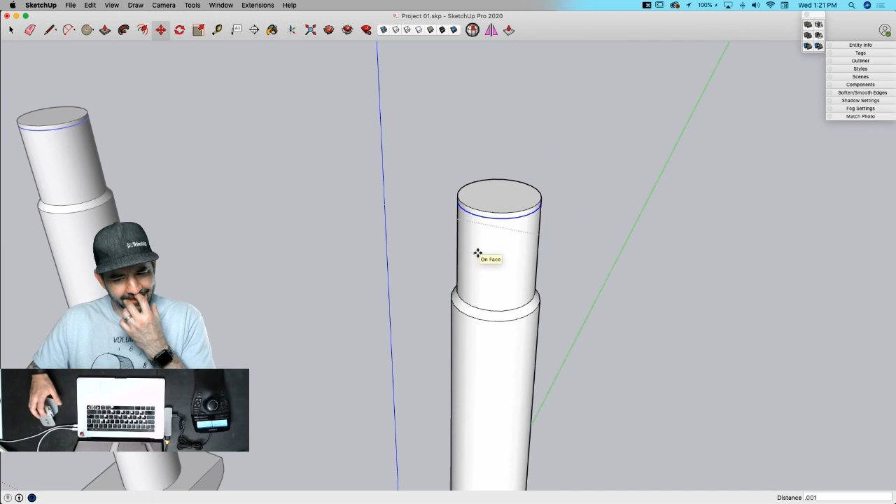I don't see a point in actually printing it.

Putting round geometry on something that's 0.001 meters, less than a millimeter. But yeah, I got you covered.

Cool, let's save that. I may, just for the sake of use, if I ever wanted to work with this at all, go into info and set that to millimeters. So now if I was to come in here and check stuff, it would be something I could easily check.

Yeah, awesome, that's done. Save. Stick a fork in it.

That's right, next, next. Oh man, it's like a sweatshop. Actually, it is a sweatshop, I'm like 78 degrees right now. Oh, I actually do have heat, geez. I do have an air conditioner in here, but it makes a healthy amount of noise.

Ed McCougan on YouTube is asking why I don't just draw in millimeters to begin with. If I knew everything was nice square millimeters, I would have, because it's really not that big of a deal, we're not super small. My concern is when I get to really small pieces in millimeters, sub-millimeter, that gets kind of tiny. SketchUp was really built around architectural modeling, which stuff's not really smaller than a 16th or 32nd of an inch. So anything that's 0.001 inches, SketchUp has a hard time creating that geometry. It can manipulate it and support it, but it's hard for it to draw. So anything where I'm going down close to a millimeter, I generally model at a larger scale.

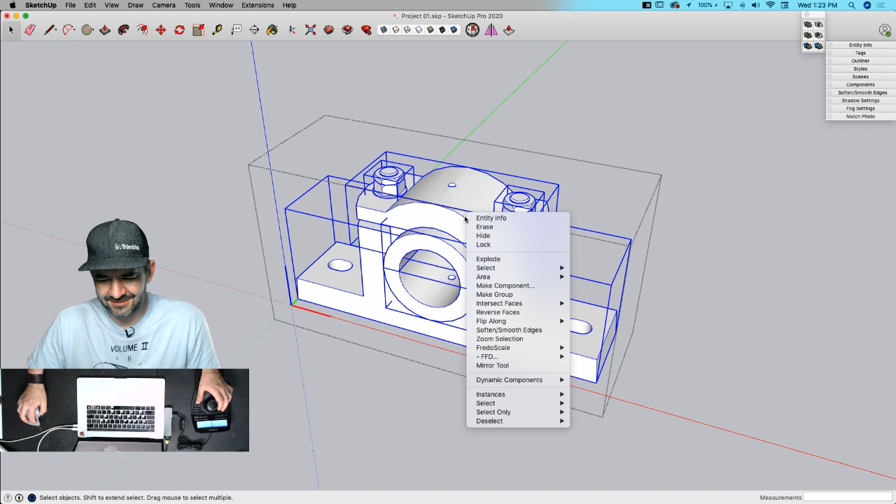Reset my scale? Oh, scale definition, there we go. Sometimes stuff's right in front of you. Maybe I should grab all those - maybe that was why. Maybe because I couldn't do multiple, but I actually want to take each piece and rescale each of those too, because otherwise I'm working on scaled versions of larger geometry. Oh, it's because of these. Nope, that works too.

Because I just scaled the larger container, I could have exploded out of that first container also. So yeah, that was good. I'm gonna save that again - let's start a new one.

All right, this next one maybe we'll do this quicker. Just fly, and better - whoa. Just aspire for greatness. You said that, not me.

All right, so here's project 2A. This has a lot of numbers in it too. Yeah, it does - what the heck, like somebody likes numbers or something. All right, so I have 1, 2, 3 pieces with a bearing and some nuts and bolts.

All right, so I'm gonna do the same thing. I'm just gonna take pictures of the main piece. This is just the regular screen capture, nothing special - this isn't SketchUp or anything special, this is just how it works on Mac. It's command print screen, or control print screen on a Windows machine, something like that. I'll grab all this mess at the same time, just grab all that together.

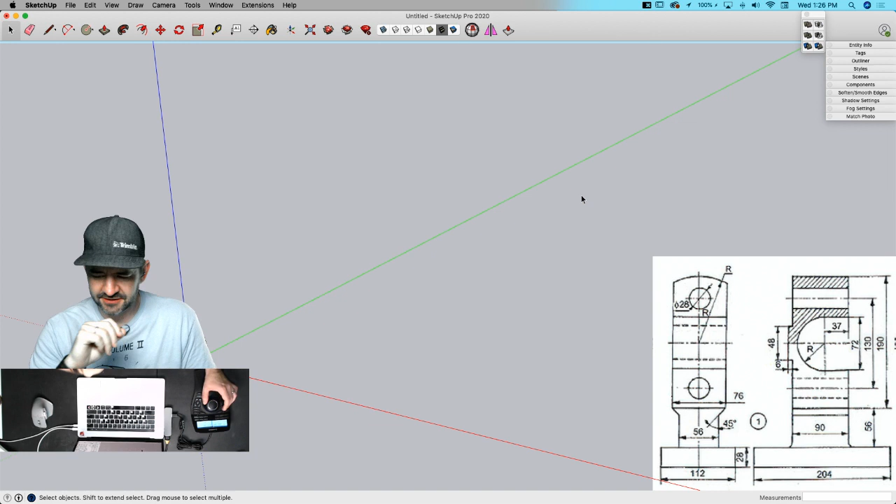We should do one of these Wednesday sessions where you actually trace on the drawing just to see how well that goes. We could do that - you want to try that on here? Let me... I'll leave it down here for... well, no.

Let's get rid of this, we'll see what happens. Stuff's just so crazy. Let's go import - mad world, that's where we're at, that's the life that we live. The world, Vida Loca - the world, I don't remember how to say world. Terra Loca? I don't know. What are we doing? What am I doing?

Sorry, import - all right, let me go grab my picture. Let's import it as an image. All right, drop that. Okay, so this right here is 204, so I'm gonna have to do some scaling up. I'll say 204, and resize that all. All right, there we go.

So here's the thing, and this is what I would say about drawing off of really any drawings you get: even though you have something to snap to, I would still always input dimensions if I have the option. So unless I really have a missed dimension and want to inference where that's at, I wouldn't just click here to draw. Because if you look at my dimensions, this is 203.2 by 30.37, but it's supposed to be 204 by 28. So drawing onto scale dimensions is not a bad thing - you can use the inferencing to see where stuff is relatively, but it's not going to be the perfect way to get that geometry.

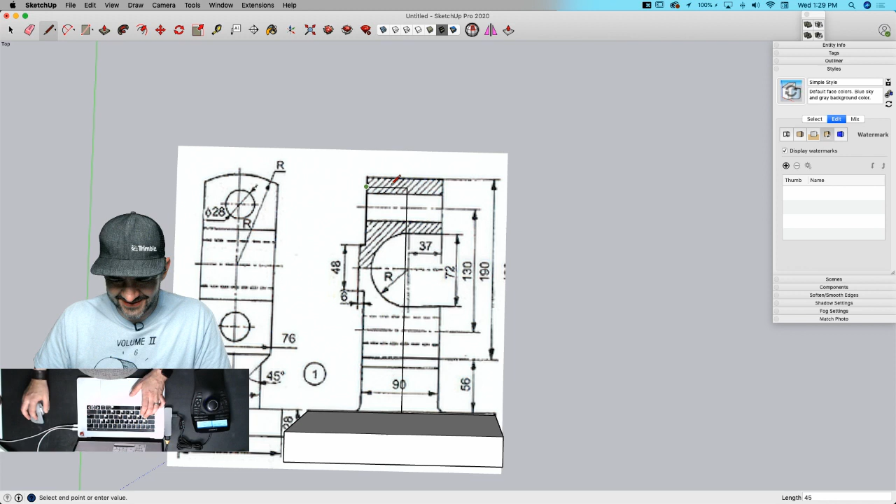Yeah, this happens every time I try and work with floor plans - not awesome. So I'm going to drop that down. I went over 45, which is half of the overall dimension of 90.

All right, I'm going to turn on X-ray to continue tracing this thing. Okay, so actually I'm going to keep that last line. So this is something that actually happens at 56 right here where it splits, and then here's my 190.

And I can only assume, the way these dimensions are, that this is supposed to be centered. So I'm going to go to my center right here, I'll come out 6, and then I'll go up 24. And then I'll just copy that rectangle.

All right, that's that little bump out right there. And then from the center, I got 72 halves. It's right here, which comes in 37. Whew. This, ladies and gentlemen, is why you don't do the trace-over and hope for the best accuracy.

Jody asked for it. Sorry to pass the blame immediately.

Yeah, this is good though, because people are always asking about doing floor plans. And honestly, it's not necessarily a bad thing to do, but what you need to not expect is to just pull in an image or even a DXF or PNG.

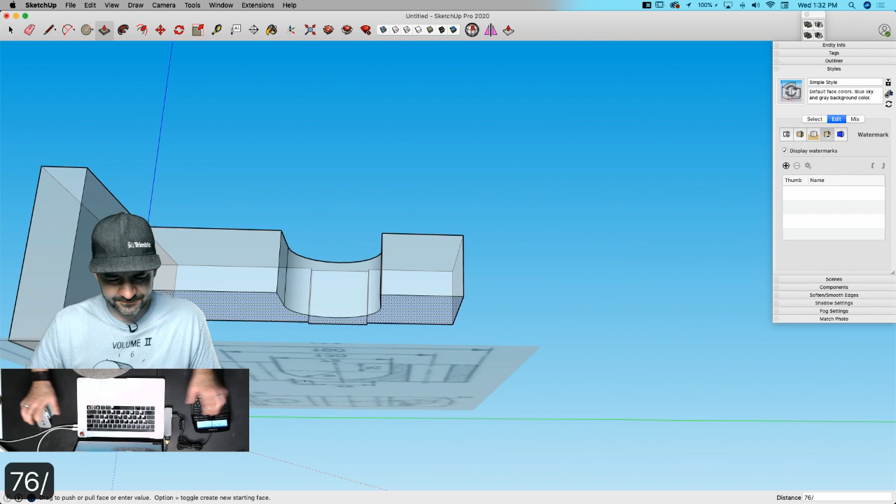So yeah, I guess the argument at this point can be made that how much time is being saved by doing it that way versus just having the reference image and pulling dimensions off of it. I don't know, I can't tell you what you should or shouldn't do. Yeah, I don't think you lost terribly much time, but there definitely was not an advantage to tracing.

Not quite as clean either, because now, well, it's not too bad. So now what I can come in here is say that I could put these two profiles on here.

So from the middle, it's 56 halves, and then that goes up 26, comes across, and then I have a 45 here. So what I'm gonna do for the 45 is actually grab this line right here and option copy it to 45 degrees.

There you go, now I can rotate from this point. I wouldn't want to rotate from this point because the midpoint here is off, since it's cut. So I got to come to a different midpoint that lines up. Option copy that over on the other side, and then I can take that and push-pull through to the back half, through to the back.

Yeah, I don't like this modeling laying down very much either, so we're gonna get vertical. I'm gonna come up here and... all right, what else we got?

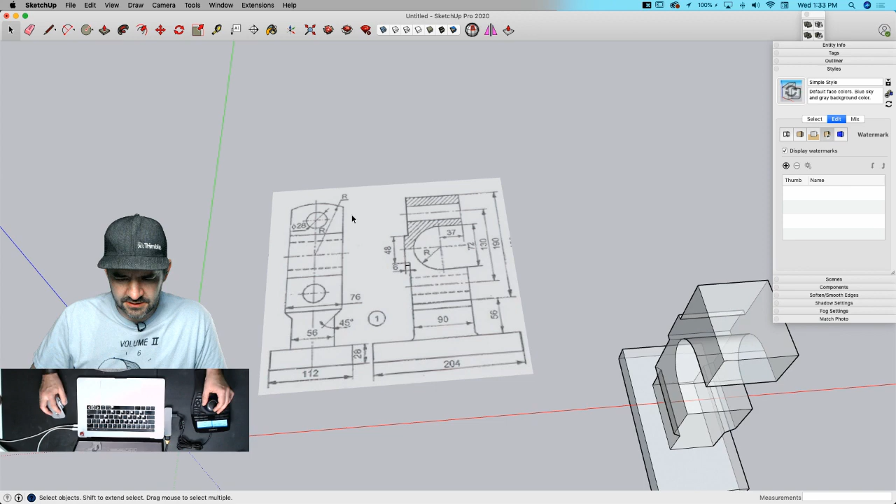All right, so as I look at it this way, that's done. But if I look at it this way, I got two things. I got roundness here.

It's from the middle, okay, so I need to do a circle. My circle is inferenced at the middle of this, so I'm going to draw a circle from the middle of that line right there, straight up to here, and then just push these pieces back.

Alt erase that, I'm gonna get rid of X-ray too. X-ray is nice, but I really struggle seeing what I'm doing in X-ray. I don't know, it's a thing, it's reality.

Okay, last two pieces, I think, are these two holes. So these holes are from the middle.

I want to come up half of 130. There's one, and then from that same point... oh boy, something got weird there. 130 halves again.

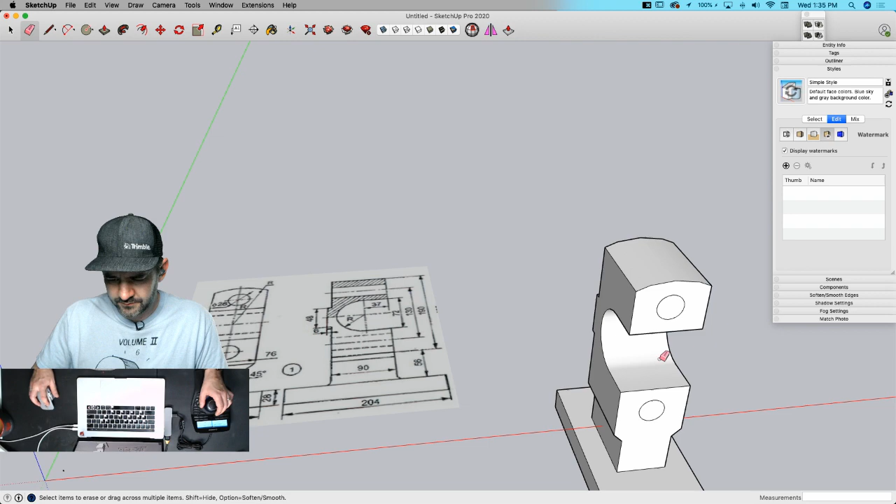And then I have two holes that are 28, so 14. So go right here and pull down, 14. Now let's do another one right here, 14. And I can delete all these lines, and just... one more. Push that through to the back side, double click on this one to pull it through.

All right, and I think that's everything. So if I look at it from the side, I think I got all that, clean a little block there. If I look at it from the front, got my cut there, circle, circle. Yeah, so I think part one is done.

So I'm going to grab that. Hey, you know what I haven't done? Wait, hold on, let me look back. You guys just don't care anymore. Yeah, what happened? What changed? Jody just divulged that nobody cares anymore. Project... I heard a new phrase.

It was quarantine fatigue, I think that's what's going on. Yeah. My wife and I were talking about, heard the term freshman 15, when you first move into the dorms and you're eating, you gain a little extra weight that first year, that freshman. So I figured yeah, there's something like that too, but it's not 15 pounds. So I've gained my quarantine 20.

Oh no, that's problematic. Fortunately, I'm only visible from here up. No, I've been working hard not to, but there's definitely a difference between real life and quarantine mass gain.

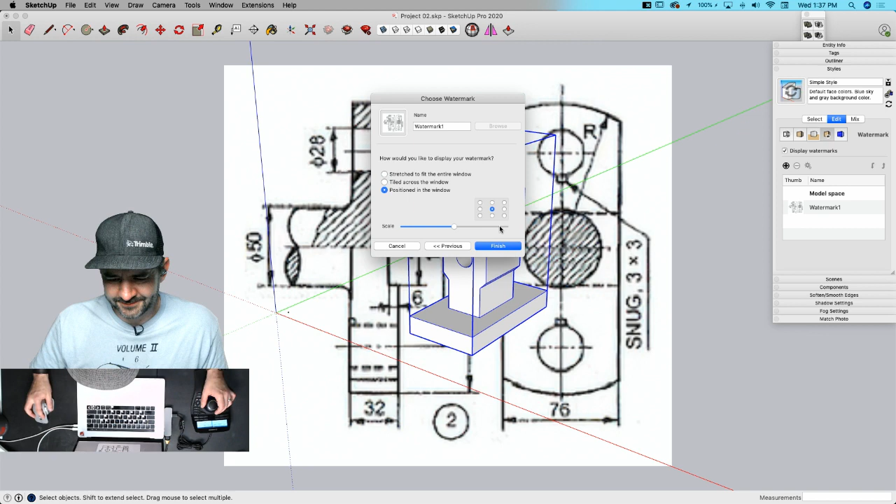Okay, so this piece, I'm assuming, is the piece that goes back here because it has this notch in it.

I think what I could do, I think I can recycle here too, because it looks like this dimension is 48, this dimension here is 6. So what I'll do is grab these pieces, not the bottom part, but these pieces right here and copy it. Then I'll go out of context and paste that in place. Now I'll take this face right here, rotate that from the center of this square. Find the center here, find the center here, option, copy it down. I'll be able to tell if it's right if the holes line up, and they do.

All right, and then I'll triple click all that, make that a new component, which I'll call part 02. Now if I go in context, actually hide the rest of that to work on it.

All right, so I'm gonna grab all of it, reverse faces, because this is the inside I'm looking at. Now it is 32 deep, so I'm gonna grab this, pull it this way, option to make a brand new surface, 32. I'm gonna do the same thing here, option, pull it all the way through to here. Then to close this side right here, I'm just gonna draw a rectangle at the top, like that, and then I can get rid of these extra lines.

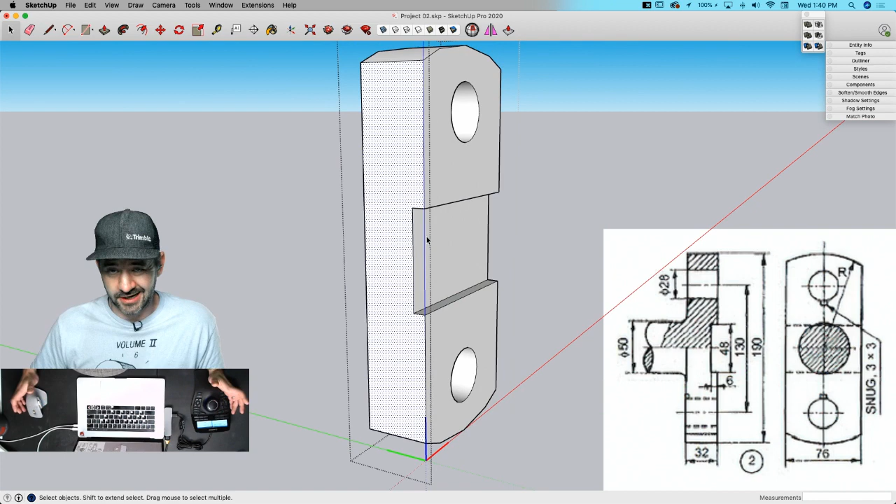So that's pretty simple. I do have some reverse faces because I did an option, I inverse some stuff by making that new face, but it was the only way to pull past this stop point all in one go. I could have stopped there, subtracted 6 from 32, and then pulled the rest, but it's easier to right click and say orient faces rather than do subtraction.

Now I have to figure out what I'm looking at. There's comments and questions, let's do them. Is there a fillet or rounded edges? Brad is also wondering why components are better than groups on this one.

My general workflow has me create components for anything that represents a thing in the real world, or anything that may repeat. Anytime something repeats, a component makes it nice because you edit one copy and they all get changed. The idea of if it's a real thing in the real world comes to the ability to put names on it, put prices on it, or additional data that I can put in a component that I don't have available in a group. So that's where I go with it, and you guys probably have ideas out there too.

There's probably a good half dozen different ways, rules people have for components versus groups. I have gotten to the point where I make almost everything components. I use groups for temporarily connecting geometry to isolate it from other geometry, or if I have a collection of parts and I want to make them all stay together, but they're not necessarily a new part, then I'll use groups. So that's my thought on it, but it's really up to you how you want to use those pieces.

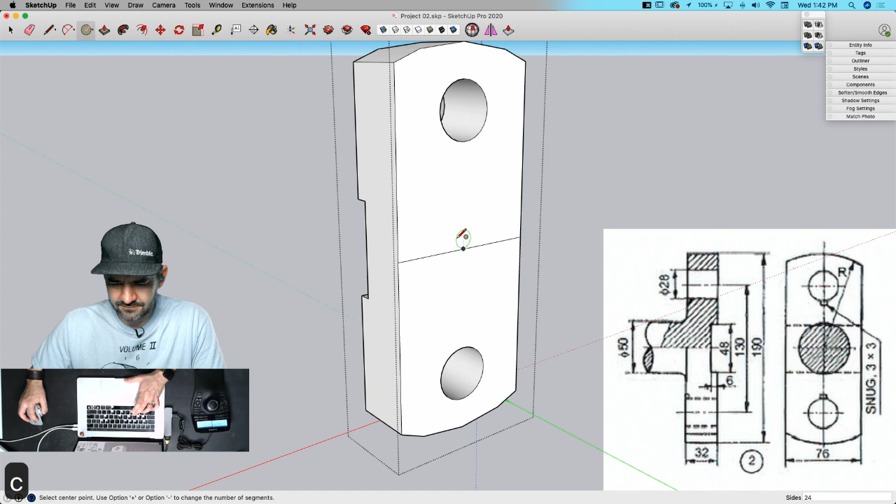So I guess that bar can be whatever length you want, because it looks like it just goes out into infinity, right? Yeah, so I think you should do one of those cut-off jobs like it has on the left. We'll model it into the actual drawing.

Let's do that. First I want to do a teeny little bit right there. Dave has posted his model, he said 2, and I'm going to come this way, 2. I'm going to draw an arc between those two pieces, grab this and this, it goes all the way around, and say follow me with that.

For this I'm going to grab this piece right here and make a copy of it. I'll take that, rotate it 90 degrees, grab by the side, and rotate it 45 degrees. Bring it, wait, something I did wrong. I grabbed the wrong axis. 45 degrees, axis is 1.

Some guys will just never learn. I get to say that about myself. There's a line in Demolition Man about somebody always wanting to ice skate uphill. It's always confused me because I don't know how you ice skate uphill, since ice just kind of flattens it. So it's flat.

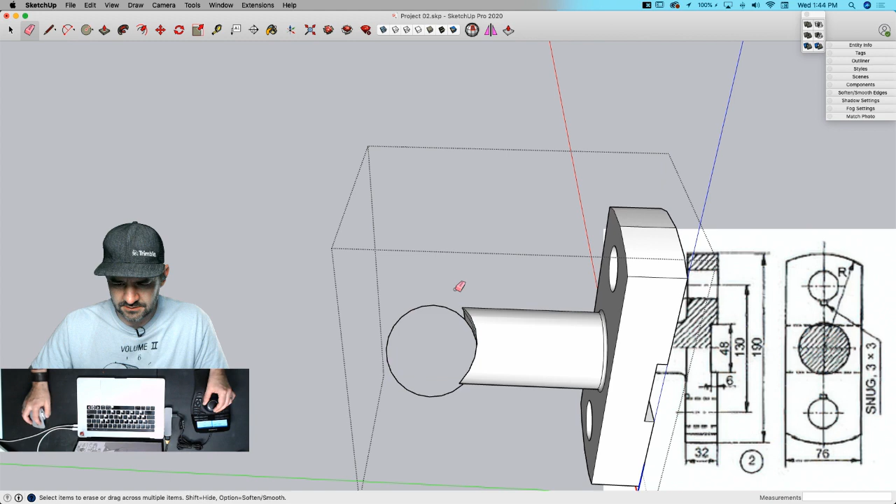All right, I'm going to take this, reverse it. There we go. Now I'm just going to grab all that, intersect face with selection. There we go. Grab all this too. There we go, oh yeah, that's the stuff.

Okay, oh yeah, my little notches. I still don't get it but I'm gonna do it. So I'm gonna come this way, 3, 1.5, and I'm just gonna push it in 3 too, because I don't see a depth number. There's my notch, do another one here.

3, 1.5. Let me know what this is for. Oh, I don't care, sure. I mean, it's modeled, I was just curious if anybody knew what it was.

All right, looks like that piece is done. Boom, we're running through them. Actually I'm going quicker. I thought a lot of times I'm like, all right let's just knock this thing out, 20 minutes of exposition later. Let's get started, that's it. But this, if actually your mouth feels like it's going, just get out of your way. Stupid word hole.

All right, let's go double click here, change that again to this piece right here. Probably scale that up a little. Oh, this one's gonna be cake.

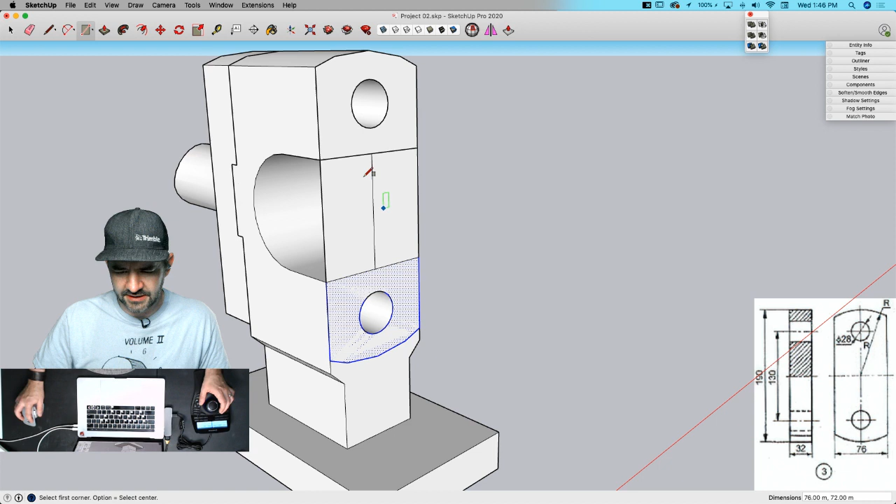I'll take that, go to the middle here, and I'm going to do this while it's in 2D. I'm going to put a rectangle right here, triple click, make component, part 03, get rid of this, and pull this out. 32. Check some dimensions: 76 across, 190 out to out, center of hole to center of hole should be 130.

That's every dimension we got, so that's done. No crazy notches, no weirdness. That was all those notches that really slowed us down on the first piece.

I like that idea, Brad. I'm gonna make a t-shirt that says stupid word hole. How about an arrow pointing up on top of that too?

Okay, that looks good. I don't know if I saved last time, so we'll go ahead and do that. Might as well, I mean what else are you gonna do?

I got it, I got the command S, I got the fingers to do it. I'm kind of wondering why I don't have a shortcut key for save over on the mouse. Might have to look into that. You have spare, do you have any spots left you can use? No, that's probably why I don't. But I think some of these buttons have dual function where if you tap it versus click and hold, you can actually put a second command on it. I'll have to dive into that.

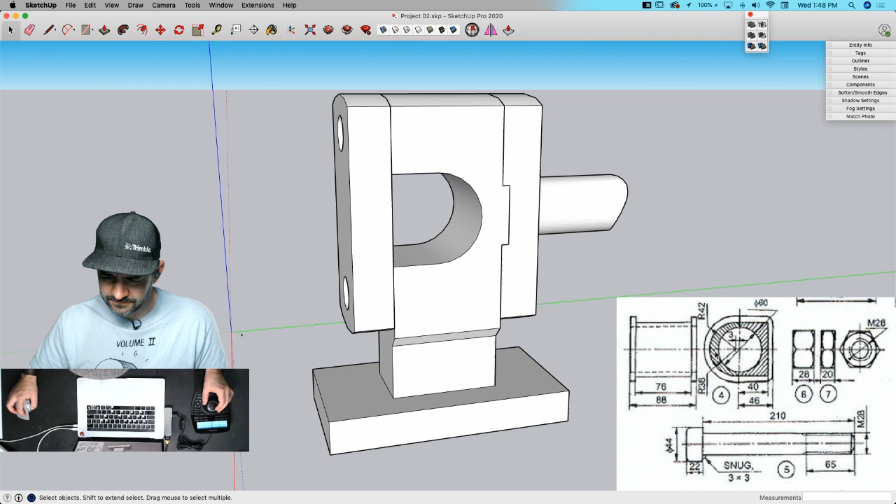I like how they draw this hatching like it's supposed to mean stuff. It probably meant something to the guy that did it. Odds are good. Maybe his boss.

All right, so let's see here. This is 72 right now.

Oh, 76, that's this dimension right here. 88 out. 36, oh, there's, okay, so here's that dimension right there, from there out to here. So it looks like, and then from there back to here is 40? I don't see this lining up right. Let's see what happens, it's gonna be exciting.

All right, so I just want to draw a shape to start with. And then, okay, I'm gonna make this into my new component, Part 04, so I can get rid of all the other stuff. So this is what my hole currently is in that piece.

So I'm seeing, there's two theories here. One of them is, well, the fact that hatching has different directions means that it's two parts, probably. Or it's a section. Oh, that's what it is, this is cut through here. So it's saying this is solid of some sort. Yeah, you guys buy that?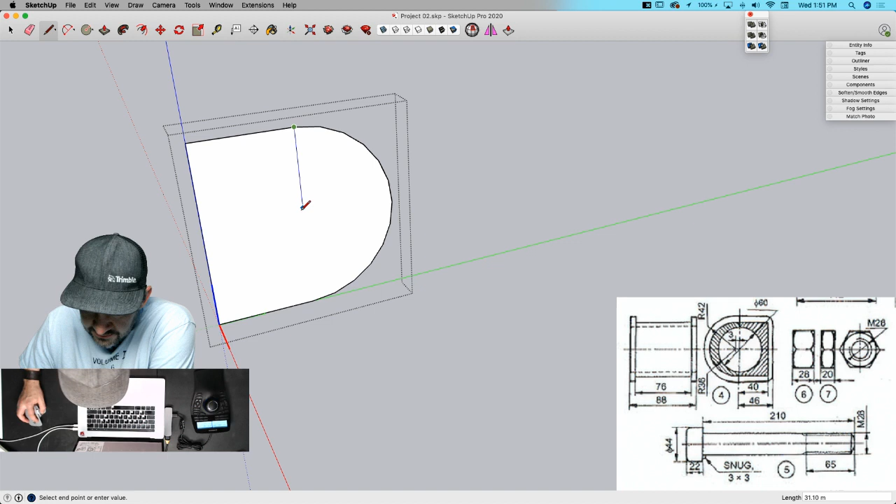So the part that is getting me is right here. So this is the inside, so this is supposed to be the part that fits inside the hole. So I have from a middle point 40, and then it looks like my R36 or 33, that's this right here, 36, if that's what it is, 6, I don't know what that is, pulled just off center. See that? It's 3 meters off the middle. So...

I kind of feel like, let me just go draw what this is here and we'll figure it out from there. So I feel like, okay, so if I start with a point right here, come back this way, 40.

And then I don't have a dimension of any kind. Oh, I guess it would be 30, no, because it would be, so I'm going to draw a line, and then I'm going to come this way 3 more meters, and at that 3 meters, I'm going to draw a circle that is, it looks like 33. Does it? Or 30? Right there?

I need a big picture, I need to get a... looks like 33 or 38. So if I was to come...

Are you using your version or Colin's? I think I used Colin's cleaned up version, but...

Which makes this 43, that makes sense. So I think... yeah, so there is 2 numbers there. One's the inside and one's the outside. Yeah, 36, yeah, 36 for the circle and 42 for the arc. Yeah? Yeah, that's the outside, that's the outside lip. So I think if that's true, then this is the shape that...

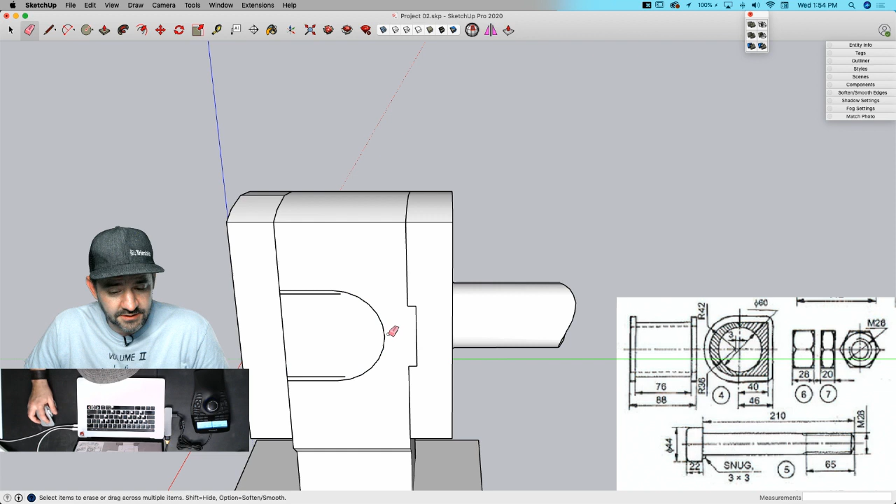So that's the weirdness that I'm seeing, is that this line would be 36 from this line plus 3 plus 40 is more than the hole that this goes into. So I'm just going to go rogue, and I'm going to just make the bearing fit in the hole that we already have, that's my plan.

So, I'm going to take that 76, and then I'm going to offset this 36 to 42. The difference between 36 and 42 is 6, which I will then pull out... 3? No, 6.

All right, same thing here. Offset this out to here. 6. Get rid of my extra. Why is that doing that? All right, I'm gonna grab it all and intersect it.

Soften that up. All right, so that fits in it perfectly because that's what we made it do. But...

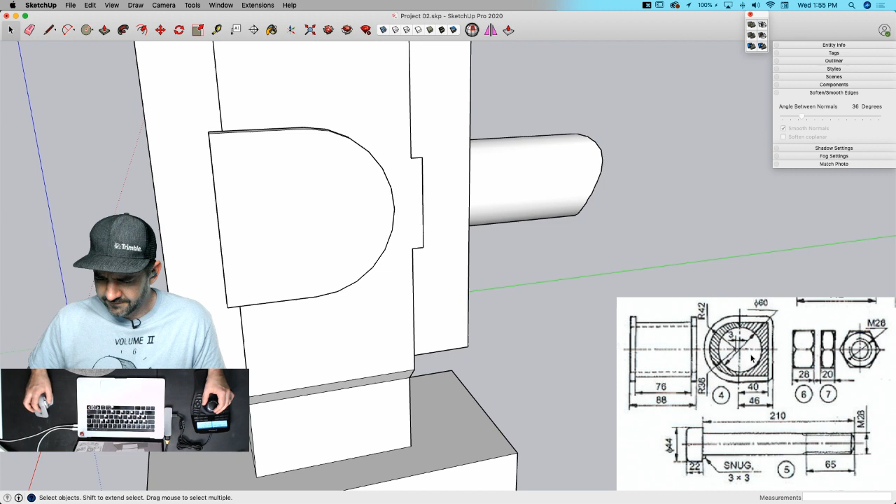I don't know that from this. Oh, 30. Okay, I see it now. So now I have one last circle which goes to the middle here. 30.

And carry that all the way through. Okay. There's our bearing thing.

I feel like maybe before next Wednesday I need to take some mechanical engineering classes so I'm a little more prepared. Yeah, because stuff's happening and I'm making things up.

Here's our little 3x3 snug. That's gonna go right there. All right, let's do this.

Are we thinking this is square again? Part sticks out a bit. Is it sticking out? It's sticking out this much. Oh, I see, so he posted a picture of his close-up of the bearing.

Oh, is that where that extra 3 millimeters came from? Yeah, I guess so. Okay, I'm gonna move this back 3.

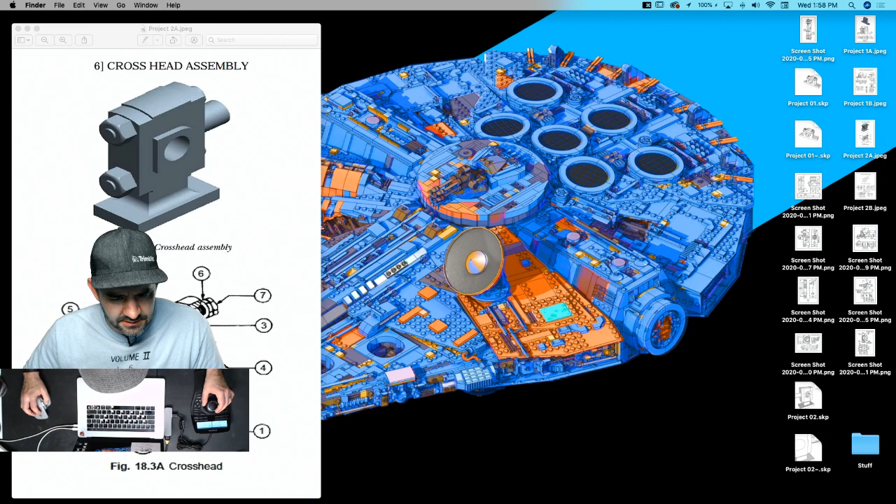Okay, so what are we thinking the heads are like here? What's everybody feel like this is? Because I don't think, I'll confirm, we'll double check, we'll look, but that's a weird bolt head. Just a round circle. But that kind of shows a round circle. Is that supposed to be like a hex Allen wrench? That's the only thing I can think that has a round head like that.

All right, well, I'm not gonna argue with the picture. I keep this up because it's so useful. I'm gonna close that. All right, Dan says round head. I'm sure he's not lying. Maybe not intentionally, but what if he too has been misled?

All right, so I'm gonna start at the center of this piece, and I'm going to do this by circle again. It is 28, so 14.

No, that would be smaller than that, huh? And 28 would be the outside, so rather than 14, I'll just drop by a millimeter, I'll say 13.

I bolt that way, put that through 210. I'll come back up here. I'm gonna get my snug in here first.

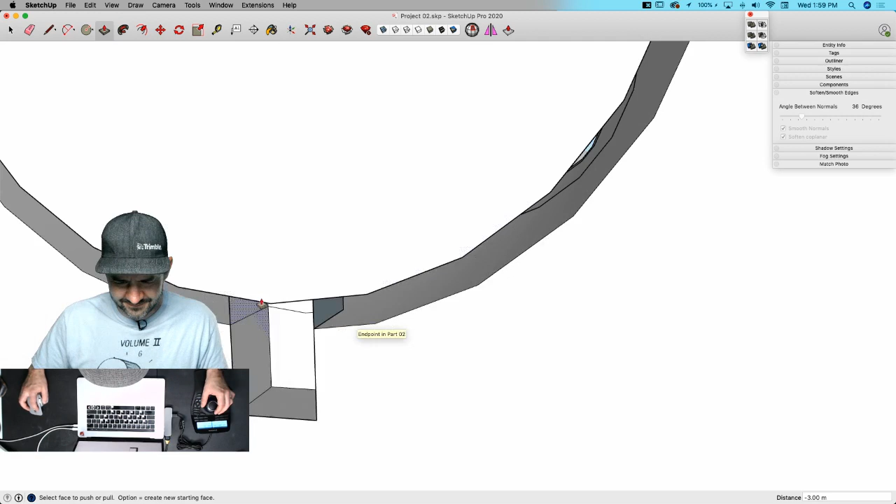Like how I talk about that thing like I still have any idea what the hell it is. There we go. The fact that you keep saying that thing, okay, maybe that totally negates all. Yeah.

Okay, so then from there, I'm gonna go put another circle here on the middle. 22. Let's go to the outside there, and then I'm gonna make that a component now.

So we can come in here. All right, so I'm gonna grab that, pull that up, 22, and rather than try to pull that up, I'm just gonna close it on this end and erase it. That's just gonna get rid of it through the whole thing.

Keep my snug right there. Didn't call it a thing, called it a snug. And take snug, rather than, that's what it says on the drawing. That's right.

Then grab that, pull it down 2, then grab this outside piece. Move it back on the green axis to knock off the corner there. And then same thing down here. I'm going to go put a circle.

Make it 1 meter smaller and pull that back 65. I'll grab that circle right there, scoot it back. There we go.

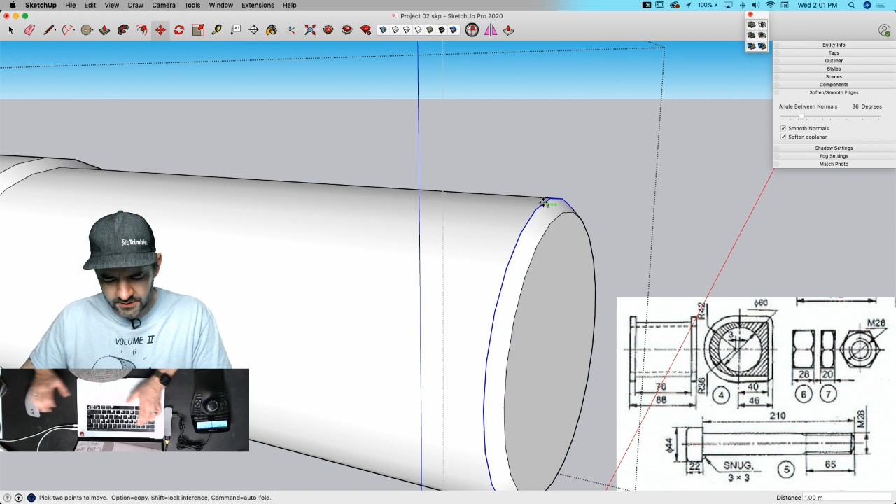And then I'll do the same thing that I did before. Again, right here, just drop this down 1. Then move that back on the green, 1. Yeah, that looks like a bolt.

All right, now I have 2 bolts right here. I'll start with the middle. I'll start with the circle.

And then on top of the circle, I will draw my 6-sided polygon, sometimes known as a hexagon, but not into witchcraft or anything like that. Like, the precision that comes with how many sides. Maybe you should call it a 6-sided hexagon. That would be doubly precise, right? Well, that would sound redundant again and again. Ugh, repetitive and redundant.

Whoa, that's 28. That's something, isn't it? Is it just not big enough? Should I have gone bigger with my hex? I'll do it, I don't care. I'll go big. You're a madman. Yeah, I've stopped caring apparently.

Let's go, let's move this from the side. I don't want to go so big that I go off the thing, but all right, there we go. Push that back to 28.

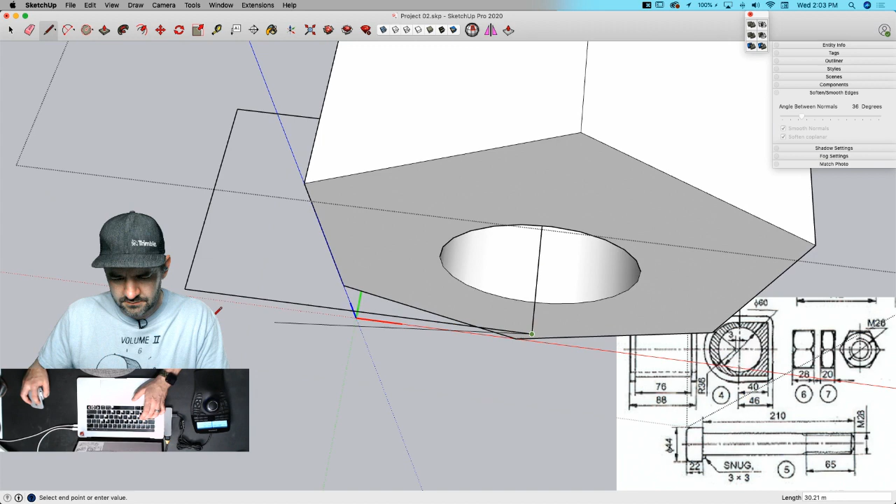And then I will take all the way to the edge. No, close it. Grab an arc, throw an arc out here. Maybe something like that. And let's get a little more.

Whoops. Really struggling, my 3D mouse is really getting odd right now, I don't know why. Got oddness happening. All right, so I'm gonna take that and just see what happens if I rotate that.

Is that gonna knock off my corner? No, not at all. So I gotta bring that in. Maybe a little more.

I am realizing as I'm fudging with this, technical term, that I could probably make this a little bit easier by measuring. I can actually check the measurement here, and that's the profile of my cutoff piece.

But you know, I'm not obviously. I'm gonna draw a line right here at the middle, and I'm gonna take this piece and push it to that line and stop it right there. So I'm only gonna cut off now half of it, and I can take it with the cutoff corners to make the full nut.

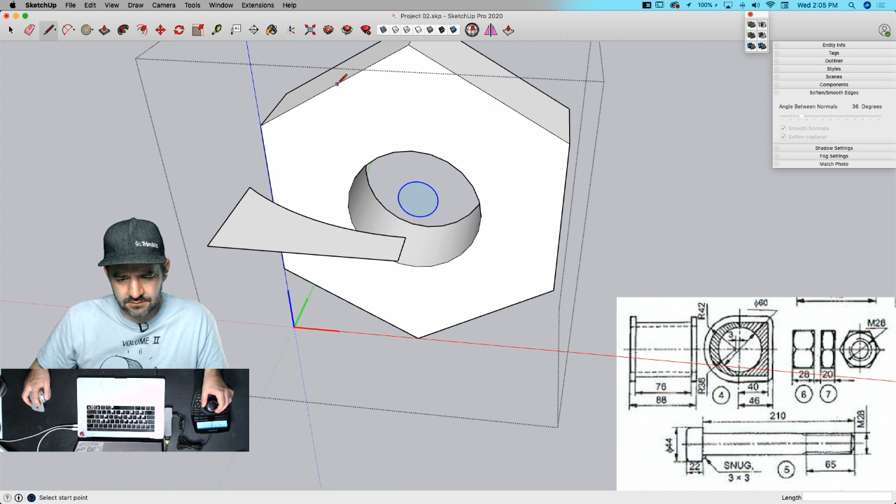So Dave said that the nut's probably 41.3 across the flats. McMaster Carr is who told him that. I'm not sure who McMaster Carr is. I think...

He's nuts, personally. Well, I'm gonna call this a bonus nut because it's 51 something. It's bigger. I don't think he's following this stream, so you can do whatever we want. Yeah, that's right, take that, McMaster. Forget that guy, am I right?

All right, so grab all of that, make that a new group, and get rid of this.

All right, let's check for solid real quick. Not solid. What's your problem? You're solid. Could be more solid. What is your problem? Something to do with that right there, because I can't erase that chunk. Is it just slightly not good enough?

Okay, I can fix this. All right, we're good. So I'm gonna take that, subtract from that, take all of that, option rotate, boom, get rid of my interior faces.

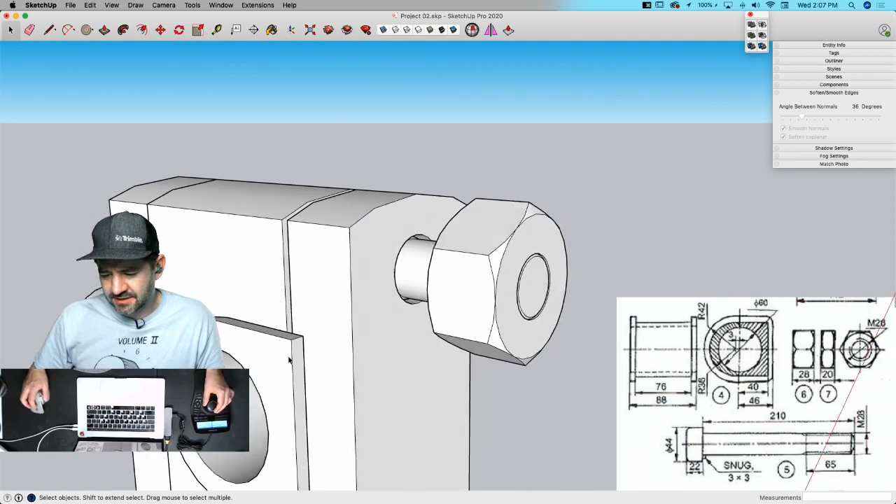Cool. All right, so I'm being a little flippant with my exact dimensions, but the next nut is a different size. I'm not a fan of total complete chaos, so we'll try to be a little bit more precise.

So this one was 28 and this one is 20, so first thing I need to do is make this unique. I'm going to go to my entity info and change it from part 06 #1 to 07. So the way I can take 8 out of this is just by grabbing the edge geometry.

So I want to grab this stuff over, is that in another? So I'm going to take this edge geometry like that and move that this way, 8. I don't want to just take the whole thing and scale it, because if I scale it, it's going to actually change where those round corners are and flatten them out. So by just moving that in like that, I get that.

And now I can take these 3 pieces. Let's see, where should I move them from? Oh, actually I can't move them, they have to be flipped, because my indexing piece right there. So I'm just gonna draw a line right across the middle here, rotate right here, option, flip it around 180 degrees. Yes, thank you very much.

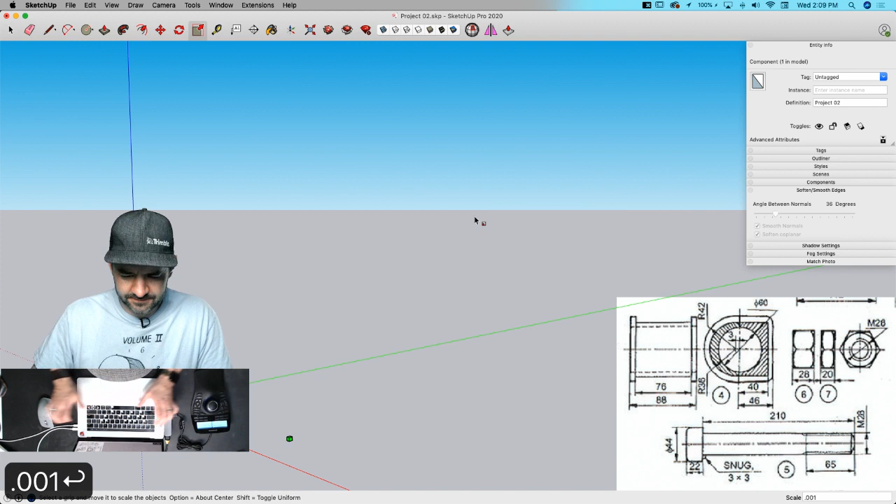All right, take the whole thing, scale it down by 0.001. Scoot that back. Dave said it slides on a rail.

I think the nice thing that Dave's got going on is he can just kind of make stuff up over there. That's true, we really just trust him, don't we? It's all about establishing yourself as a learned one. That's right, then all of a sudden you just assume. Yeah, you know, it really makes you feel like I should lie a lot more. Is that where you're going with that? I feel like you could probably get away with a lot more lying than you're really taking advantage of right now. Yeah, probably so.

All right, so that is part number 2. Project number 2, made of a series of parts. Done.

Let's get rid of this watermark right here. Whew, that's good stuff. That was fun. That was a weird one, an unusual part.

I'm still confused as to why these two parts seem so much more complicated than our simple little assembled things typically are. I think it's because a lot of the ones we previously did were just one piece, and I feel like we've moved on to intermediate machinery or machining. We've moved out of just machine this chunk of material, round a corner and put a hole in it, to having to figure out with less information how to do more.

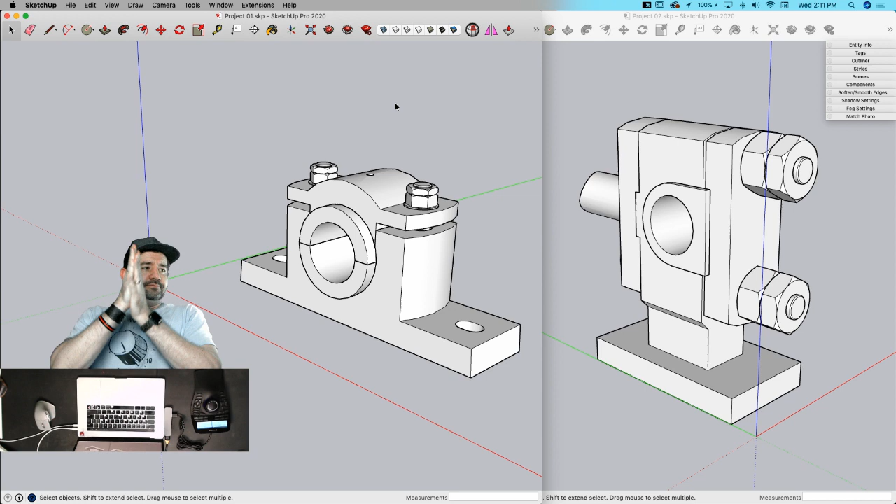One. There we go, yeah, there we go. Two projects. Done. That was not bad for a Wednesday afternoon.

I still feel like there's some parts that are just way too vague in that whole thing. I won't lose any sleep over it. Is this split too? Does anybody know? Because you have the same issue right here, right? This is a bearing, you've got to get something into it.

So I'm finding these apparently in SolidWorks - somebody is using SolidWorks and making these same things. I see a couple of these exploded images, and that one does not. The SolidWorks tutorial I'm seeing with this particular unit does not have that thing split. Well, based on something we just found from a Google search a few seconds ago, we'll assume that is absolutely correct. I've been researching this for minutes now, and I can find nothing to prove me wrong.

Well, that basically makes you an expert. So what are you going to do? Exactly.